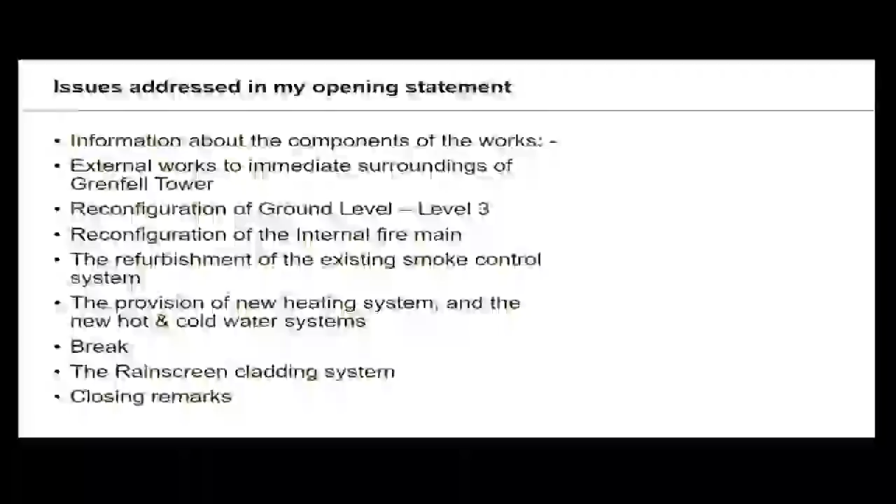This includes a description of the work done to the interior of the building, as well as the works done to the exterior of the building. I will provide an overview and then explain in the following order the external works to the immediate surroundings of Grenfell Tower, the reconfiguration of ground level to level 3, the reconfiguration of the internal fire main, the refurbishment of the existing smoke control system, the provision of a new heating system and the new hot and cold water systems, before ending with a detailed explanation of the materials forming the rain screen cladding works as I have found them in my work for the inquiry.

My colleagues working with me on my factual investigations are Susan Deeney, Peter Woodburn, Tom Parker, Alfie Chapman, Danielle Antonellis and Graham Flint. Dr. Flint is in attendance to operate the series of photos, illustrations and animations throughout the presentation, which we have provided in order to help understand the technical issues I'm focusing on today.

The original building construction and layout. As I've explained in section 3 of my preliminary phase 1 report, Grenfell Tower is a 24-storey building with a basement level and a ground to level 23 inclusive, plus a plant room located above level 23 at roof level. It is a residential block built in the early 1970s and is located in the Lancaster West Estate in the North Kensington area of London. The Lancaster West Estate is located in the Royal Borough of Kensington and Chelsea.

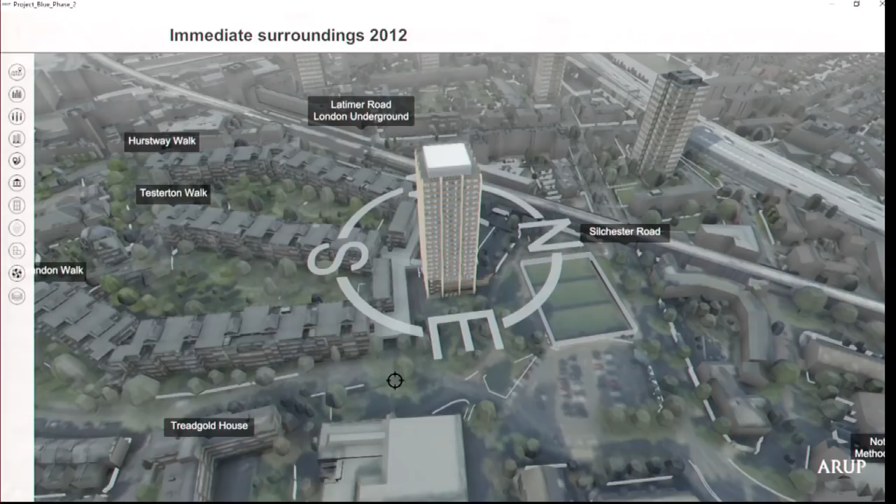To help explain the external spaces around the outside of Grenfell Tower, I have drawn on some additional information not currently in my report, using online mapping services and commercially available context models of the surrounding area. There was a walkway at level 2 of Grenfell Tower that allowed access from each of the finger blocks over to the tower. The finger blocks extend to the south side of Grenfell Tower and enclose 2 large green spaces. The area to the immediate east of Grenfell Tower is Lancaster Green, and there were children's play areas to the immediate west. To the north side lies Silchester Road.

Grenfell Tower is owned by the local authority, Kensington and Chelsea London Borough Council. Grenfell Tower was part of their provision of social housing in the borough. The management of social housing in the borough was devolved in 1996 to the Kensington and Chelsea Tenant Management Organisation.

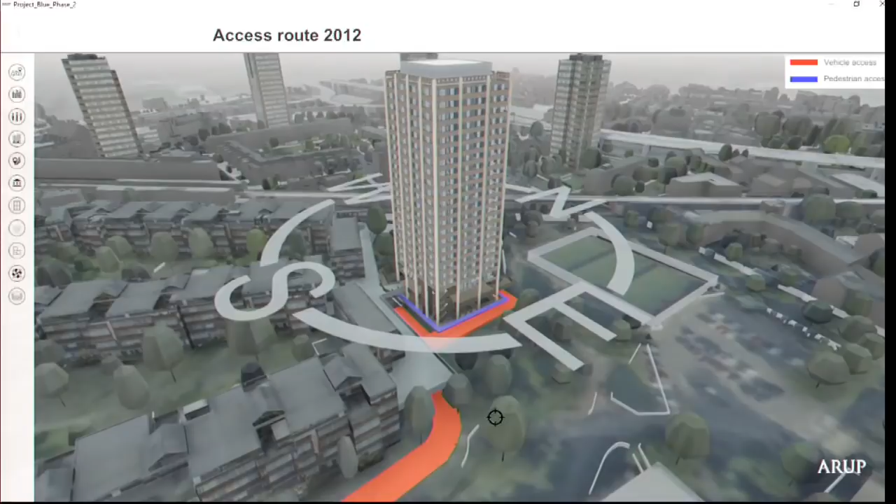The presence of the walkway is important in retrospect because it means that whilst it was tall enough to allow fire vehicles to access underneath the walkway for the purposes of internal firefighting, such a walkway provides an obstacle for unplanned external firefighting, as became required during the fire. High-reach appliances would need to move out from underneath the walkway to deploy their ladder or platform and to deploy their stabilisation systems.

The area around the east, north and west side of the building was quite open, with a mixture of grassy areas and hard landscaping. It is useful to orientate from the south side, where the 3 finger blocks are located. Originally, outside and around the tower at ground level were positioned a ball game pitch, nursery play areas and other amenity landscaping. From online mapping services, it is apparent that the amenity landscaping around the base of the tower was largely retained until around 2012.

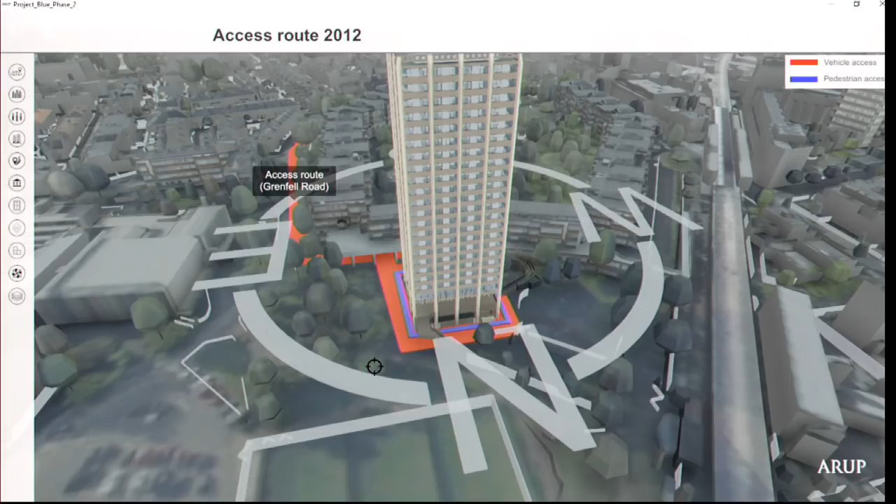In this image, all the areas around the building that could support vehicle access are highlighted in red. In its original form, therefore, fire vehicles could have moved around the base of the tower as follows: 3/4 of the south side, full access to the east and north side, half of the west side. Pedestrians, and therefore firefighters, could additionally reach all parts of the outside of the building originally at ground level, as I have marked here.

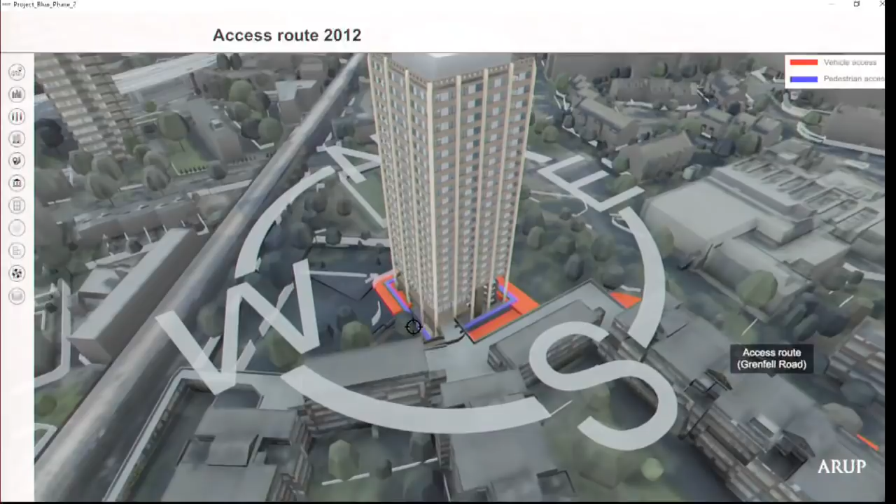Originally, there were 3 main pedestrian entry routes into Grenfell Tower. At ground level, firefighters could access the lifts within the central core there. Alternatively, they could climb one of the 3 open stairs external to the tower, up to the walkway at level 2. At this level 2, access was also possible into the central core, to the protected internal stair and the original lifts. Therefore, firefighters would have been able to access the inside of the tower by the walkway. However, fire vehicle access was only provided at ground level.

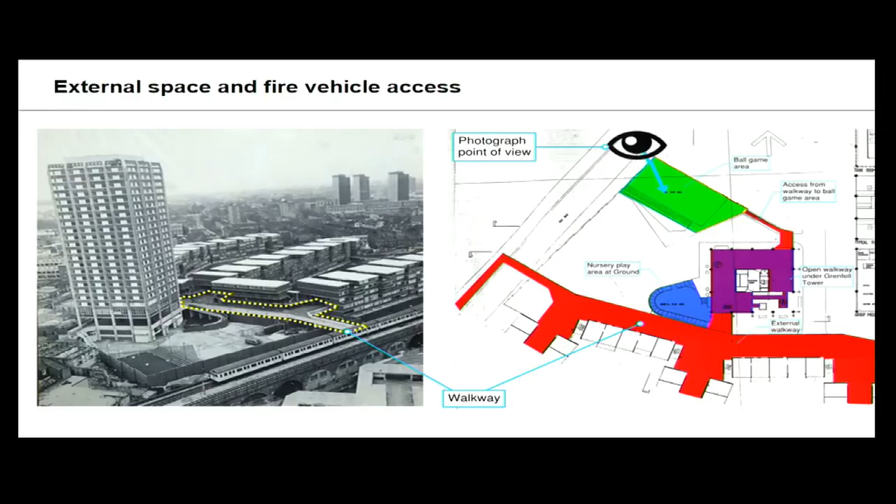Grenfell Tower is 67.3 metres tall. Originally, it contained 120 1- and 2-bedroom flats. There were 6 dwellings per floor on 20 of the 24 stories, with the other 4 stories being used for non-residential purposes. It was originally intended to house up to 600 people. Levels ground, 1 and 3 were more flexible open spaces, which were created for uses such as nursery, offices and a community health centre. Level 2 was left entirely open as a continuation of the walkway connecting to the adjacent blocks of the Lancaster West estate.

Each storey in Grenfell Tower is 2.6 metres high, except for level 2, which is 4.3 metres high, and level 3, which is a height of 3.9 metres. Grenfell Tower has a plan floor area of approximately 22 by 22 metres. It has a single, central, reinforced concrete core, reinforced concrete floors, and perimeter reinforced concrete columns. Reinforced concrete cross walls were provided to separate each flat at level 4 to level 23 inclusive. These walls did not extend to the basement level, nor did these walls exist at ground to level 3.

The structural stability mechanism for Grenfell Tower is that of a conventional concrete building with a lateral stability core in the middle of the building and concrete columns around the perimeter supporting gravity loads. The floor is a flat, reinforced concrete slab, transferring load directly to the core. At the perimeter of the building, loads are transferred into the columns directly by the floor and via the precast perimeter beams. Additional support to the floor is provided by the concrete cross walls between the flats.

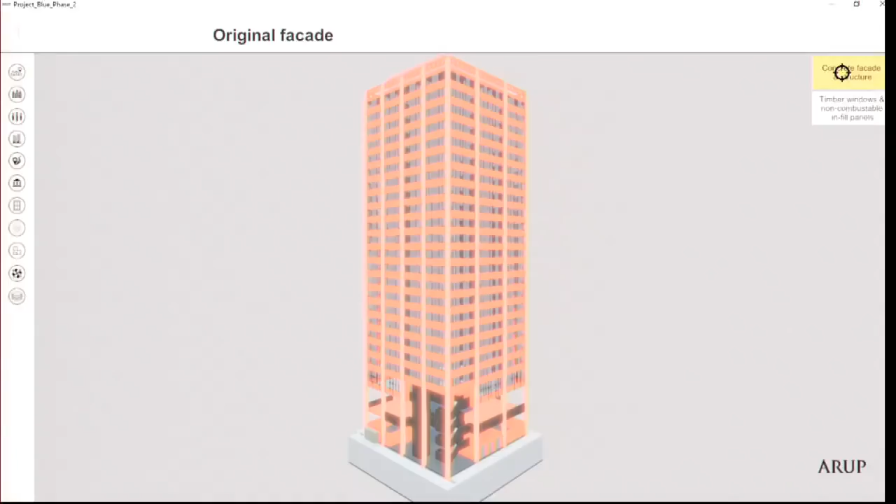The original external wall of Grenfell Tower consisted of exposed concrete surfaces and glazing. The perimeter beams were solid concrete. The opening between each perimeter beam was filled with a combination of sliding windows held in timber frames and non-structural, non-combustible infill panels. The specific material of the infill panels is currently unknown, but I understand it to consist of asbestos-bearing cementitious material.

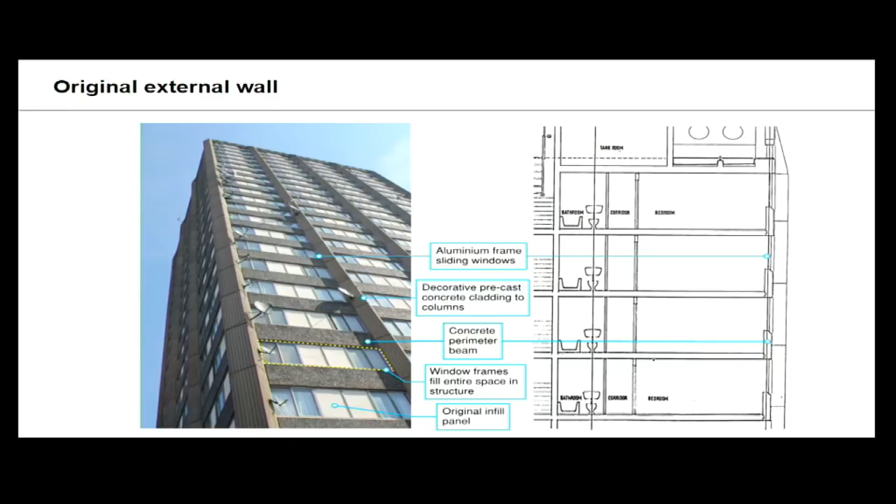The external wall was a single system. This meant there was no void or space concealed within that external wall. From here, I will refer to such spaces, concealed spaces, as cavities. Cavities are spaces enclosed by elements of a building or contained within an element of the building. I will be presenting more information on the issue of cavities in building construction later in my presentation. I now move inside the building to describe the original construction of the window and the external wall internally.

Here is a photograph from the inside of a 2-bedroom flat before the refurbishment works were undertaken. This is taken from section 8.4 of my report. The photograph shows the original form of the interior window finishes and the windows themselves. The windows were originally side-sliding, metal-framed windows in a wooden frame fixing system.

As I have already noted, these windows and the adjacent infill panels fully filled the space between each perimeter beam from floor to floor. The window sills, the window jambs on both sides, and the head of the window appear to be lined in timber. The original infill panel also appears to have been faced with timber on the room side.

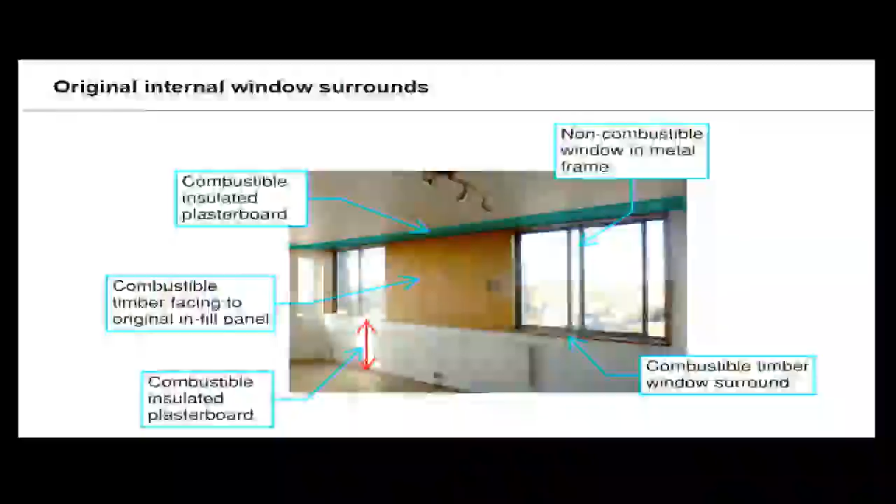Below the windows, a plasterboard covered with a polymeric insulation, a product called pearl board, was applied directly to the concrete perimeter beams. This layer of pearl board was also applied to the concrete ceiling in a small area close to the external wall, but ran along the full perimeter of every room in every flat at ceiling level.

Therefore, in terms of combustible material, the original design contained the internal timber surrounds and timber lining of the infill panel, as well as the pearl board above and below the window on the room side. This combustible material did not extend to the outside of the building.

Levels ground, 1 and 3 contained a nursery at ground floor, community use rooms at level 1, and a health centre at level 3. The layout of levels 4 to 23 was the same on every storey. There were 6 flats on each of these storeys. The flats in each corner were 2-bedroom flats, and the remaining 2, one on each side of the core, were 1-bedroom flats. Reinforced concrete cross walls and floors separated each flat on level 4 to level 23.

Therefore, each flat was enclosed in fire-resistant construction. This is known as compartmentation, and I will further describe this concept later on. Within the central core was a common lobby that provided access to each of the flats. This lobby also provided access to the residential lifts and the only means of escape, the single escape stairs. This lobby was a separate compartment to the flats and enclosed within its own fire-resisting concrete walls.

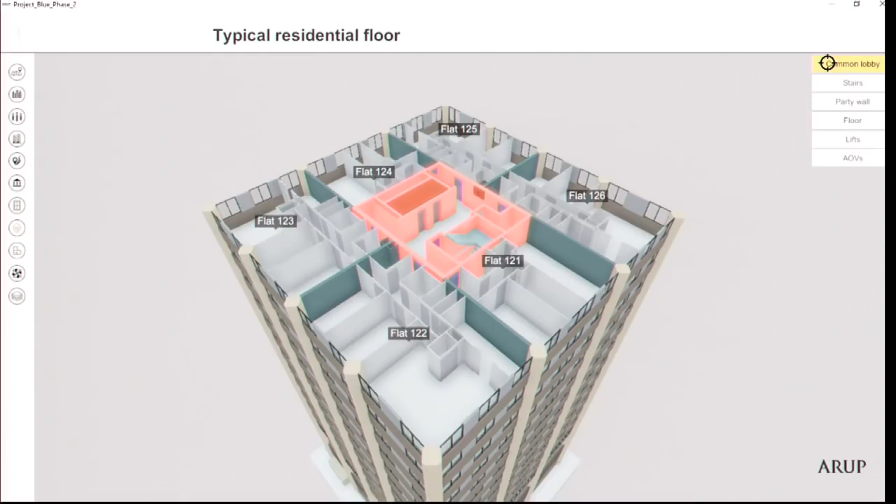The original smoke control system used automatic vents on the north wall of the lobby to exhaust smoke into smoke exhaust shafts on the north side, with fresh air being supplied from fresh air shafts through automatic vents on the south wall of the lobby. These smoke and fresh air fans were provided for firefighters to operate if required.

The basement has been used since 1974 as a plant space for the various electrical, gas, water and heating systems in the building, with multiple services shafts rising up from the basement through every storey in the tower. Level 24 is roof level. This level had a fully enclosed plant space in the central portion of the storey, with an open walkway around the perimeter of the roof. A ladder was also provided to the roof of this main plant enclosure.

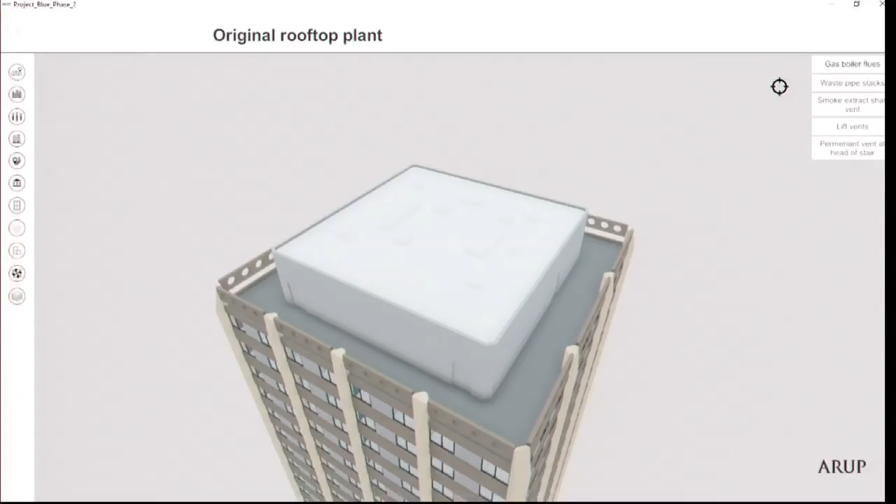There, at the roof of the plant enclosure, were located the outlets from the flues from the basement gas boilers, the outlets from the smoke control system, the outlets from the lift motor room and lift shaft ventilation systems, the permanently open vent provided at the top of the stairs, and the outlet vents to the waste pipe stacks serving each of the flats on each of the floors. This ends my explanation of Grenfell Tower and its surrounding area as it was designed and constructed between 1967 and 1974.

I will now set out the fire safety requirements for high-rise residential buildings in England, and in doing so address specifically the design requirement to provide a stay-put strategy. I will explain how it is designed and how it is intended to operate. After a short break, in the second part of this presentation, I will then explain each of the active and passive fire protection measures required to create the safety condition, the stay-put strategy.

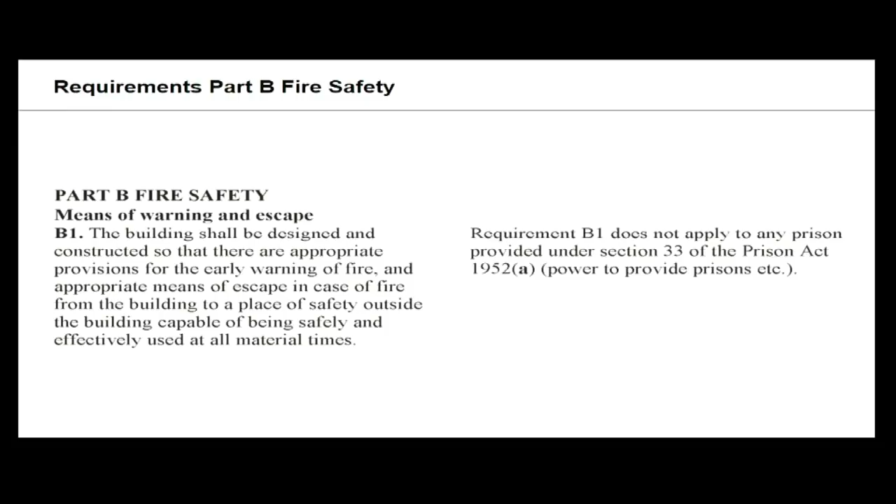Fire safety requirements are considered by means of 5 specific requirements. I have reproduced each one on each of the next 5 slides. B1 deals with means of warning and escape. The building shall be designed and constructed so that there are appropriate provisions for the early warning of fire and appropriate means of escape in case of fire from the building to a place of safety outside the building, capable of being safely and effectively used at all material times.

Requirement B2 deals with the requirements to inhibit internal fire spread as it relates to the internal linings of a building. Requirement B3 deals with further requirements for internal fire spread as relates to the structural stability of the building, subdividing a building with fire-resisting construction, and preventing the unseen spread of fire and smoke within concealed spaces.

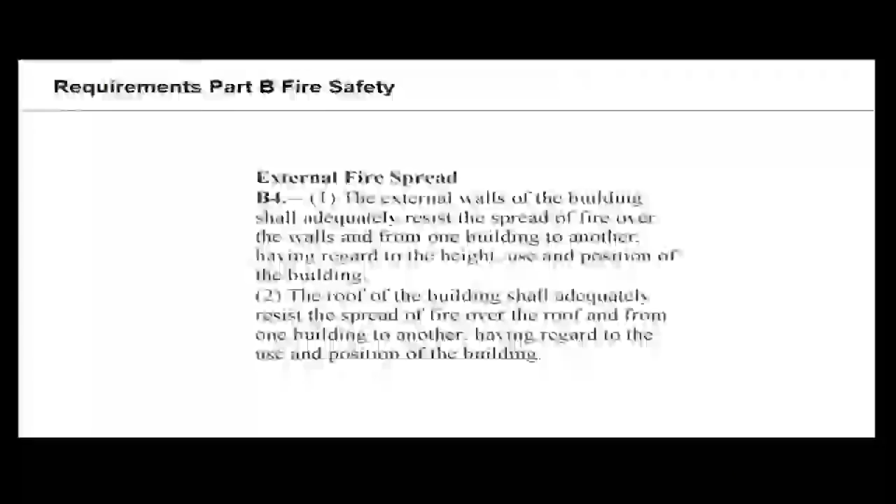The requirement B4 makes requirements regarding external fire spread, and specifically that the external walls of the building shall adequately resist the spread of fire over the wall and from one building to another, having regard to the height, use and position of the building. It makes requirements for the fire performance of the roof of the building.

Requirement B5, the fifth and last of these building requirements, deals with the requirements for access and facilities for the fire services. Specifically, it requires that the building shall be designed and constructed so as to provide reasonable facilities to assist firefighters in the protection of life. Further, it requires that reasonable provision shall be made within the site of the building to enable fire appliances to gain access to the building.

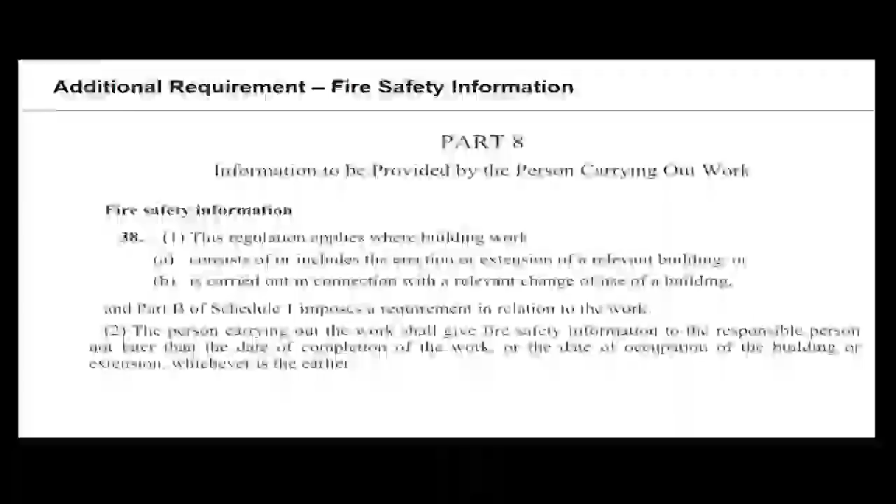There are three other general requirements, but specifically relating to fire safety. First of these three is the requirement to provide fire safety information, Regulation 38. This requires the person carrying out the building work to give fire safety information to the responsible person for that building no later than the date of completion of the work and as reproduced on this slide. The responsible person is the person who owns or controls the building.

The required fire safety information to be provided is defined in the building regulations as information relating to the design and construction of the building, which will assist the responsible person to operate and maintain the building with reasonable safety. This is for any building where the Regulatory Reform Fire Safety Order applies. This is the legislation that provides for fire safety duties when buildings are completed and occupied. The building regulations relate to design and construction stages only.

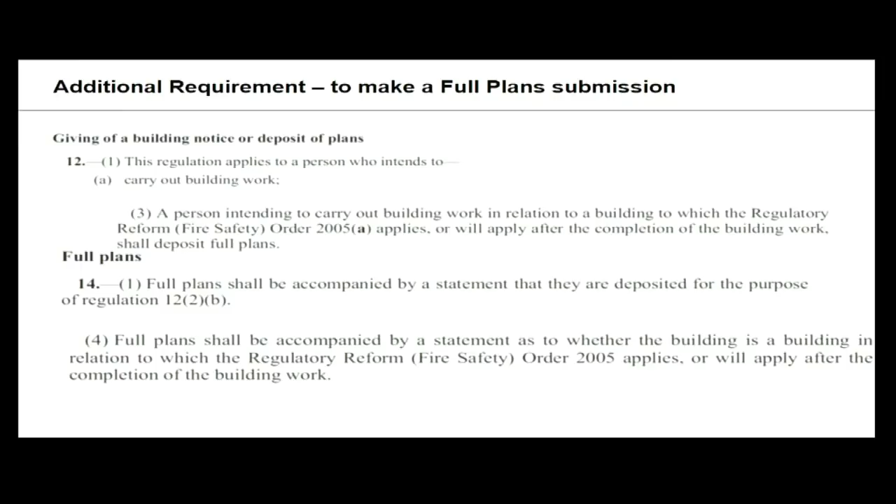There is a further requirement for any building to which the Regulatory Reform Fire Safety Order will apply once that building is occupied. That is a requirement to make a full plan submission. This means providing a description of the proposed building work and any other plans necessary to show that the work would comply with regulations. And the final requirement is the requirement of the local authority to provide a completion certificate for buildings to which the Regulatory Reform Fire Safety Order will apply.

I note the requirement for a local authority to ascertain, after taking all reasonable steps, that the relevant requirements specified in the certificate have been satisfied. The relevant requirements mean the requirements of Regulation 38 regarding the required fire safety information being provided to the responsible person and the 5 requirements of Part B. I note also that the building regulations currently state that such a certificate is not conclusive evidence that the requirements specified have been complied with. These are the requirements under the building regulations.

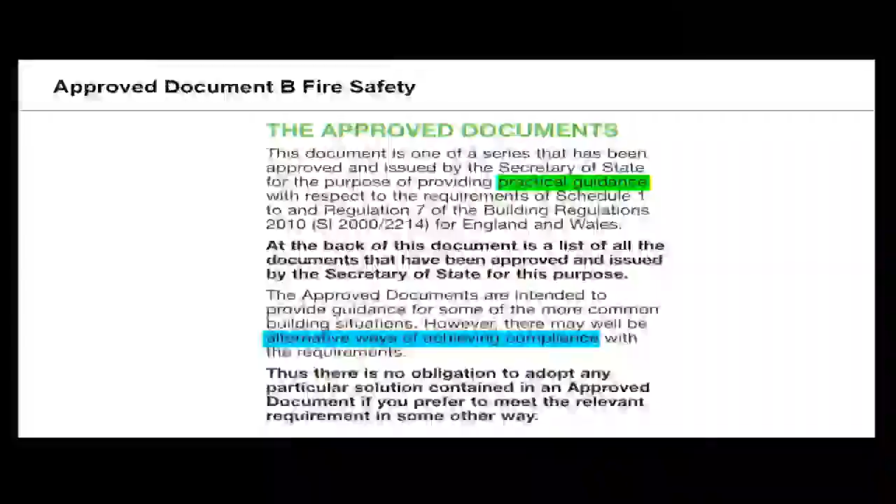I would like now to draw your attention to approved document B for fire safety, which is approved, as I said, by the Secretary of State for the purposes of what's called practical guidance with respect to the requirements contained in the building regulations. Therefore, approved document B communicates practical guidance for the 5 fire safety requirements B1 to B5 inclusive. I note it acknowledges that there may well be alternative ways of achieving compliance with the requirements.

I have no evidence that such an alternative approach was considered in matters relating to Grenfell Tower and will therefore not mention the concept of an alternative approach again. I will refer to this statutory guidance document, approved document B. Just as the building regulations directly connect design and construction related duties to the Regulatory Reform Fire Safety Order, so too does the approved document make that clear.

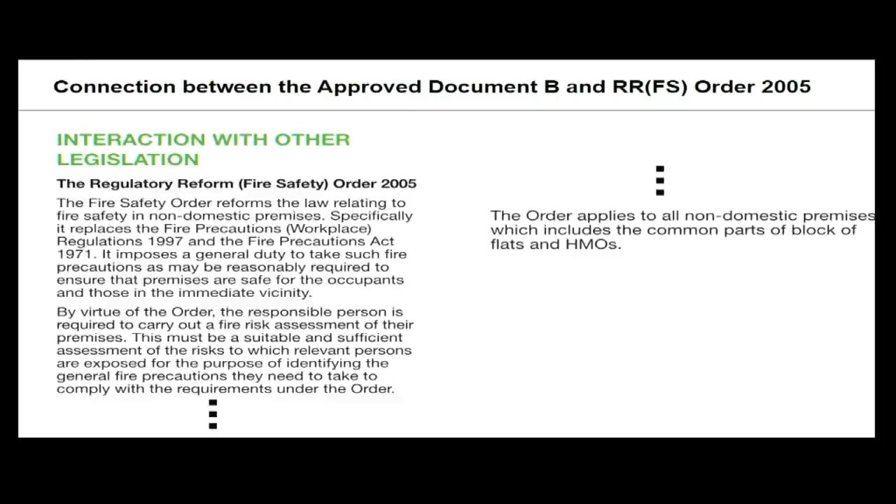The Approved Document B states, for blocks of flats, the Regulatory Reform Fire Safety Order applies to the common parts of blocks of flats only. It advises it would be useful for designers to carry out a preliminary fire risk assessment of the building as part of the design process, and how this fire risk assessment can then be used in the building regulation submission and can be used to assist the Fire Safety Enforcing Authority in providing advice on any additional provisions that may be necessary in the occupied building.

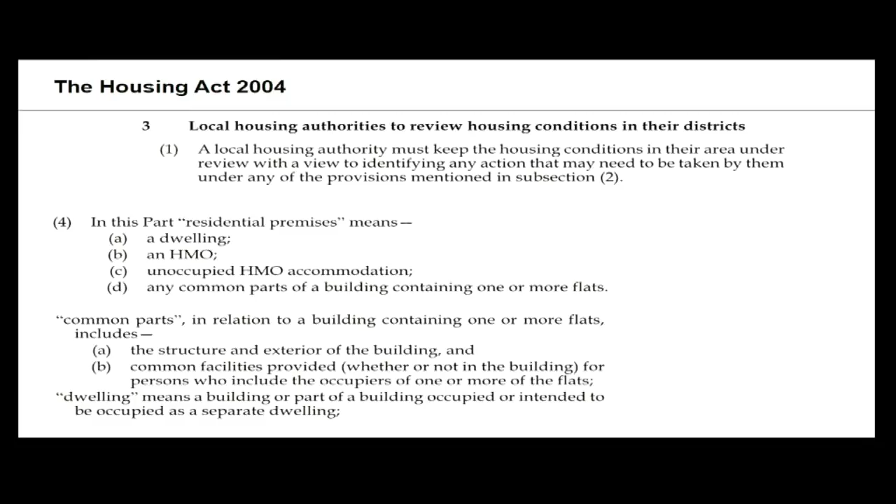However, for high-rise residential buildings, the Housing Act 2004 also applies and exists in parallel with the Regulatory Reform Fire Safety Order. Section 3 of the Housing Act requires local housing authorities to keep housing conditions in their area under review and to investigate and take action against hazards that may be present. Fire is explicitly referenced as a relevant hazard in Section 10 of the Act.

Where fire hazards are identified in the common parts of flats, the Act requires the local housing authority to consult the local fire authority where possible before taking action. It is important to note that the Housing Act 2004 states the common parts of a building include the structure and the exterior of the building.

Before I explain the Stay Put strategy, it's important to note that the term Stay Put is not used anywhere in Approved Document B. It states, the fire is generally in a flat. There is no reliance on external rescue. Measures in Section 8 provide a high degree of compartmentation and therefore a low probability of fire spread beyond the flat of origin, so that simultaneous evacuation of the building is unlikely to be necessary. And although fires may occur in the common parts of the building, the materials and construction used there should prevent the fabric from being involved beyond the immediate vicinity.

It further states these provisions assume that in the design of the building, reliance should not be placed on external rescue by the Fire and Rescue Service, nor should it be based on an assumption that the Fire and Rescue Service will attend an incident within a given time. This approved document has been prepared on the basis that in an emergency, the occupants of any part of a building should be able to escape safely without any external assistance.

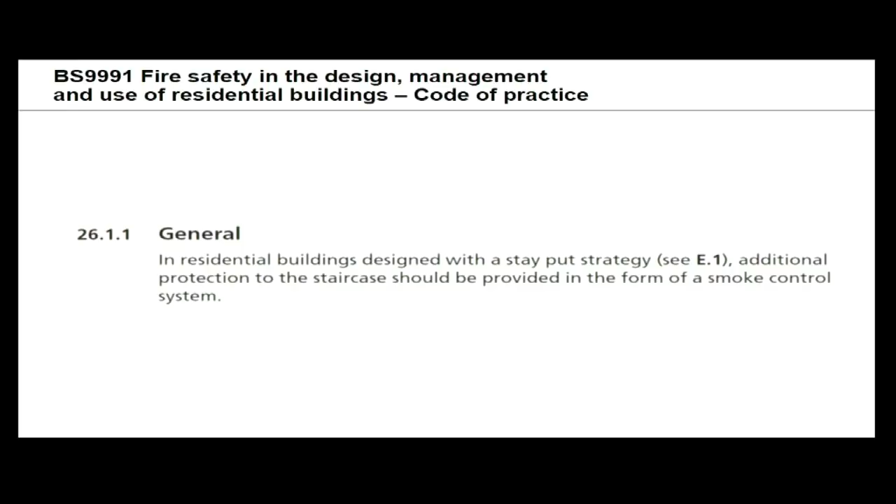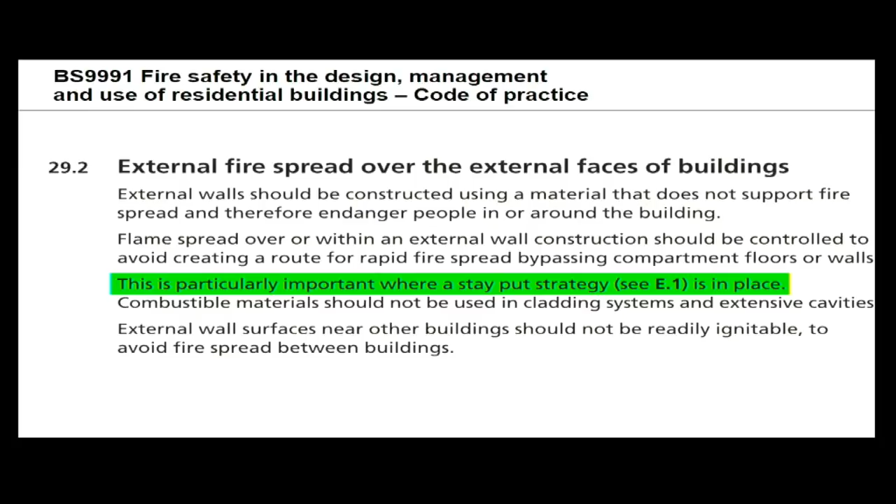Secondly, BS 9991 refers to the need for additional protection to the staircase by the provision of smoke control because of the Stay Put strategy. Thirdly, regarding an increase in fire resistance periods for structure for the occupants of other dwellings remaining in place. And finally, it specifically references the Stay Put strategy regarding the fire performance of the external face of the building. It says, flame spread over or within an external wall construction should be controlled to avoid creating a route for rapid fire spread by bypassing compartment floors or walls. This is particularly important, it says, where a Stay Put strategy is in place.

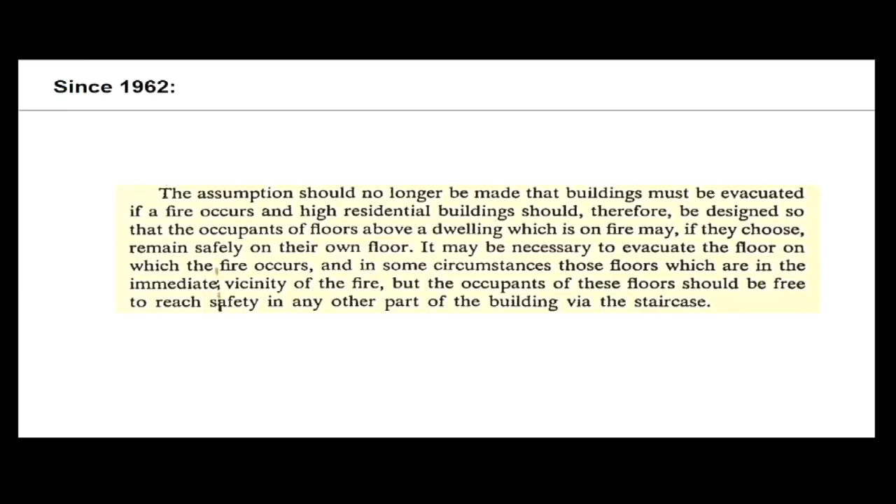And I would like to conclude with a reminder from the very first British Standard Code of Practice for Flats, referred to as CP3, where in 1962 it provided the first explanation of the Stay Put strategy, where occupants, if they choose, remain safely on their own floor, and occupants on the floor on which the fire occurs, and in some circumstances those floors in the immediate vicinity of the fire, should be free to reach safety in another part of the building via the staircase. Since that time, a total building evacuation has not been provided for when designing the active and passive fire protection measures.

I have set out each of the statutory guidance document, Approved Document B, and the British standards since 1962, because they all provide the same requirement for active and passive fire protection measures in high-rise residential buildings. I note that while stay put is directly referenced in the British standards, no such mention of it, nor what it relies upon, is provided in the Approved Document B. I will refer to those published guidance documents at times throughout my presentations today. These published guidance documents are all matters of building regulations. They are not matters of fire brigade policy.

The stay put strategy. During a single flat fire, the occupants of that flat evacuate, and all other occupants are safe if they remain where they are. The concept of being safe to remain where they are during a fire is the stay put strategy. It is the single safety condition provided for through the statutory guidance document, Approved Document B, and all versions of the British Standards for flats to date.

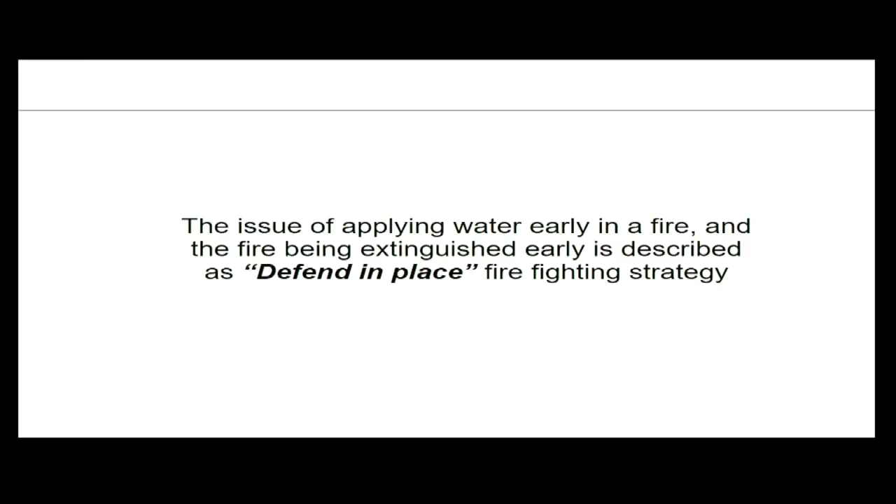Since 1962, CP3 states, the guiding principle in the recommendations which follow is safety of life. In securing this, means of escape, construction and firefighting all play a part. Section 701 goes on to state, in high blocks of flats it is essential that provision should be made to assist the fire service in applying water to a fire as early as possible. The need to apply water early in a fire and the need for the fire being extinguished early are required of the fire brigade. This form of firefighting is provided for by means of the active and passive fire protection measures in the building too.

So the building construction, its active fire safety systems and the firefighting in combination provide the safety of life and are the foundation of the stay put strategy. Defend in place firefighting also relies on the high degree of compartmentation in a high-rise residential building because it is this compartmentation that enables the single flat fire event upon which the stay put strategy relies. This compartmentation is the very basis of design.

I will now narrate an explanation of how the stay put strategy is designed to function in a fire. This is in order to explain how the design of the active and passive fire protection measures, which includes the external wall fire response, provides the safety condition required, which is for the building residents and for the firefighters. The content of this section of my presentation is drawn from sections 3.2, 3.3, 3.4 and section 18 of my report.

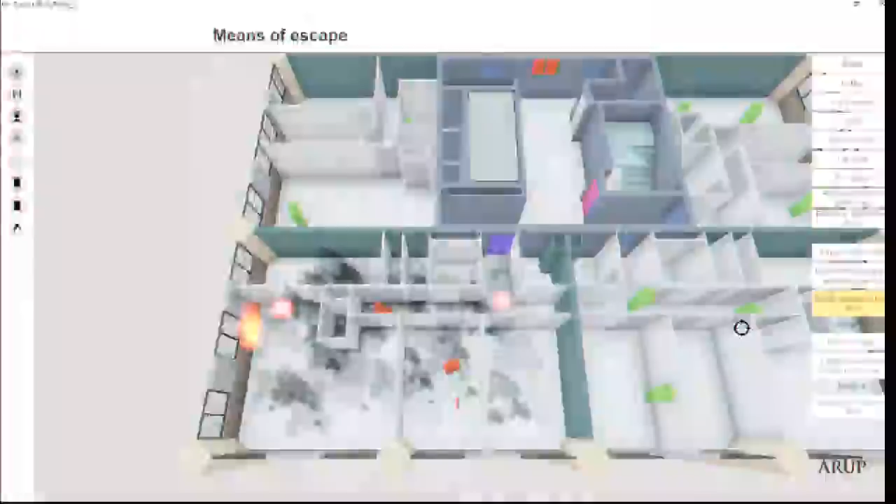In the event of a fire in a flat, a fire detection and alarm system should be present in the flat and raise the alarm for occupants in that flat only. No alarm will sound anywhere else in the building. The fire brigade will not be alerted automatically. Once alerted to the fire, the occupants should leave the flat with the door shut behind them. To support this first stage of evacuation from the flat itself, a protected entrance hall is required within the flat. In a single stair building, the person from within the flat on fire must first escape through the common lobby over to the stair entrance.

A range of fire protection measures are provided to protect the occupants when travelling through the lobby. Fire-resisting walls around the flat of fire origin, fire-resisting walls around the protected lobby and around the protected stairs, fire doors in the relevant fire-resisting walls, a smoke control system extracting heat and smoke from the protected lobby, designed to prevent smoke from being able to penetrate into the stairs, but providing some local protection in the lobby too. Controls on materials in the common lobby to prevent rapid fire spread through this part of the escape route in the event fire breaks out of the flat compartment.

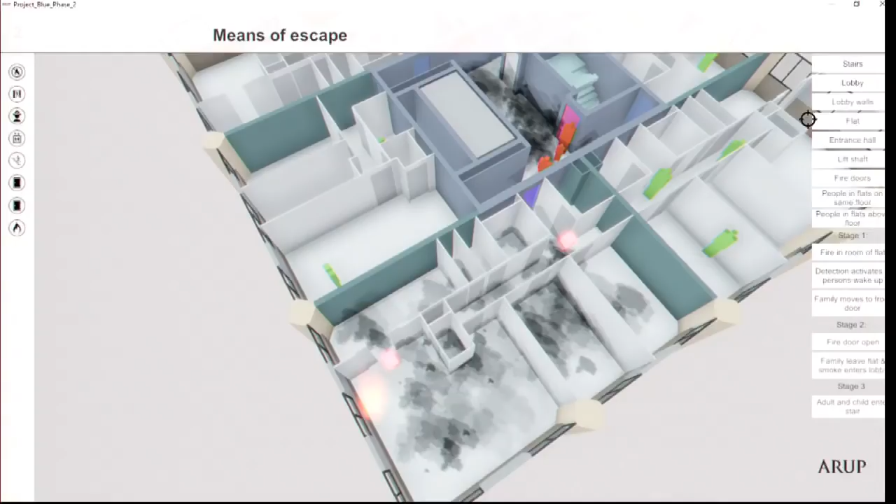People in adjoining dwellings on the same floor do not automatically evacuate. They have received no alarm or signal to evacuate. The design is focused, therefore, on containing a fire within the flat of fire origin, creating a single flat fire event. This is provided through the fire-resisting walls and floors in that flat. The final side of the fire-resisting box is the external wall. In accordance with the building regulations, the construction of the external walls are required to adequately resist the spread of fire.

Therefore, the people in adjoining flats on the same floor who rely on the same horizontal escape route through the lobby are protected, because the design intent is that the fire stays within this one compartment or box around the flat. Everything is invested in preventing the internal spread of fire. The required external wall fire performance, based on adequately resisting the spread of fire, is intended to prevent an external fire scenario beyond the single flat on fire.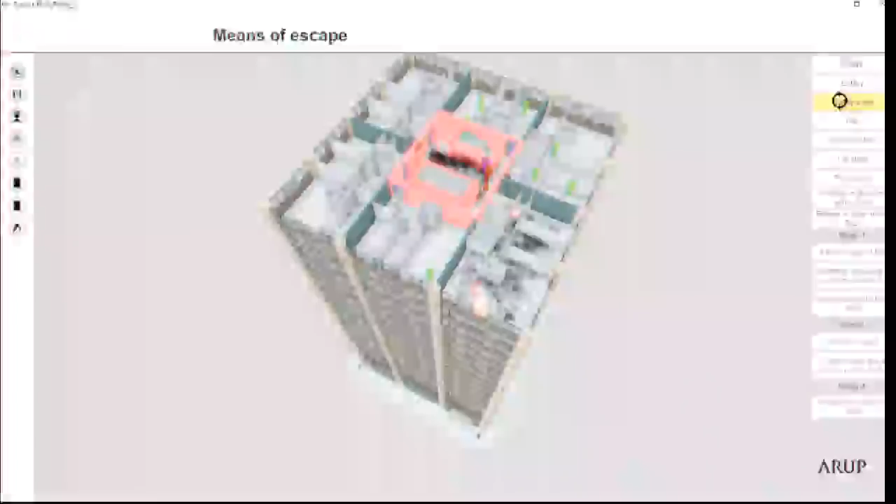Equally, people on the floors above the floor where the flat fire has started are also to be protected from the single flat fire below them, again by the measures provided to contain the fire in one flat, again through the compartmentation to the flats, lobby and stairs, along with the lobby smoke control, and again the external wall, and the requirements for the construction of that external wall should also provide protection to the people in the flats above the flat on fire.

A person requiring assistance will also need to escape from their flat to the lobby. Once they are out in the lobby, they are now separated from the immediate effects of the fire in the flats. However, protection measures for the lobby are not intended to provide indefinite protection, and it may not be safe for a person to remain within the lobby.

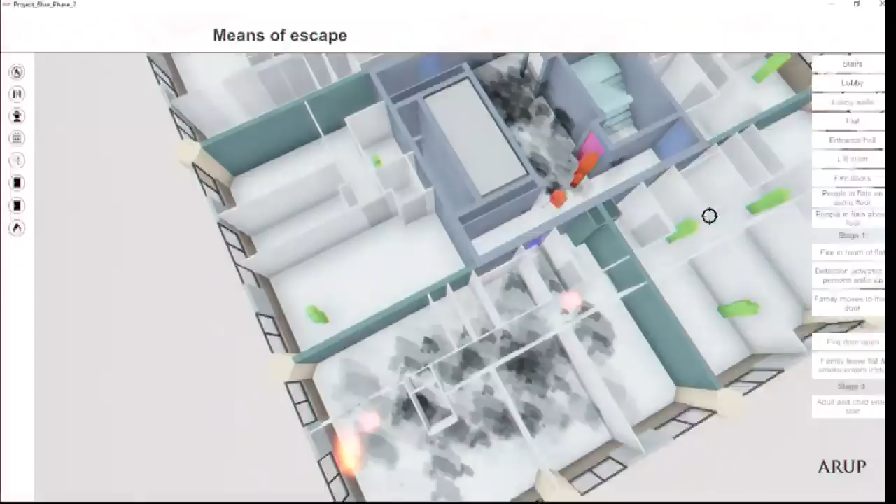At this stage, the choices available to a person requiring assistance to escape are: to escape using the stairs if they are able, to use an evacuation lift with assistance from building management if such assistance is available, to use the firefighting lift with assistance from the fire brigade, to be carried down the stairs by firefighters, building management staff, or potentially their neighbours. There is no provision required in the statutory guidance for residential buildings, unlike other building types, to provide equipment for those persons.

So there is no provision made for them to either contact building management, should they even be present in a building, nor to communicate directly with the fire service present in the building. The person can only make a personal 999 call. In other building types, refuges with communication devices are required.

Once occupants of the flat on fire have made their way through the lobby, the final part of their evacuation is down the stairs. And once down the stairs, they should now phone 999 and alert the fire brigade to the fire. The protection provided to stairs is intended to physically prevent the penetration of smoke and fire into the stair enclosure by provision of fire-resisting construction, including the stair door.

Prevent smoke from entering the stair by provision of fire-resisting lobbies, including the flat entrance fire door and smoke ventilation systems. And so also prevent the spread of fire and smoke, blocking use of the protected stair for any residents above the fire floor. The protection measures in the lobby and the stair, however, are also provided to create a safe working environment for the fire brigade.

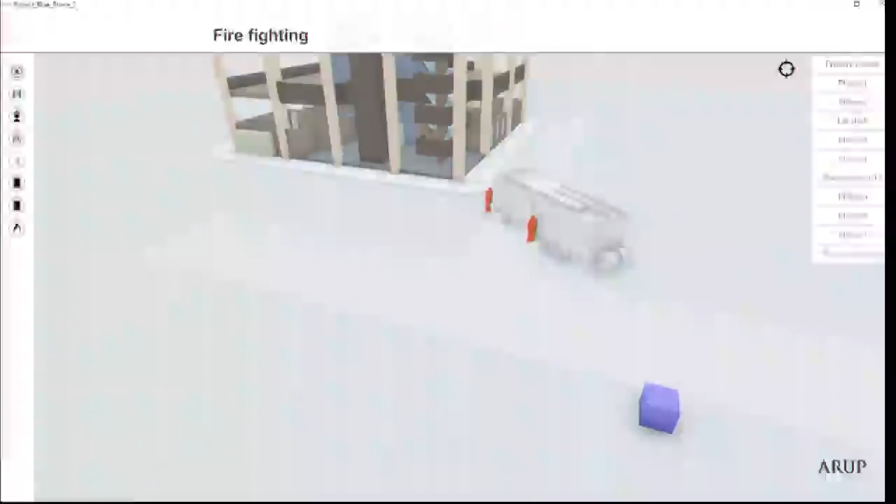The requirements of the building regulations to provide active and passive fire protection measures are relied on by all building occupants during a fire, all residents and all firefighters. Since the first Code of Practice for Fire Safety in Flats was published, it states, reliance on such appliances as manipulative types of escape or mobile ladders is considered unsatisfactory. High-rise residential buildings must therefore be designed on the basis that firefighting does not occur from outside.

This concept has been carried over into all modern design codes, where the regulations require provisions only for internal firefighting in high-rise residential buildings. Therefore, the building regulations require adequate access to buildings for firefighters and their vehicles only at the entry point to the building and nowhere else around the building. The provisions made for firefighting are also based entirely on an internal fire occurring.

By design, these provisions are made on the assumption that a single internal flat fire, contained within the compartment, will occur. The construction of the external wall to this compartment is to adequately resist the spread of fire, such that mitigating a spreading external fire is not incorporated into any of the other protection measures in the building as provided for the firefighters. The external fire scenario not happening is critical to maintaining this box around each flat. The high degree of compartmentation is also required for safe firefighting in high-rise residential buildings.

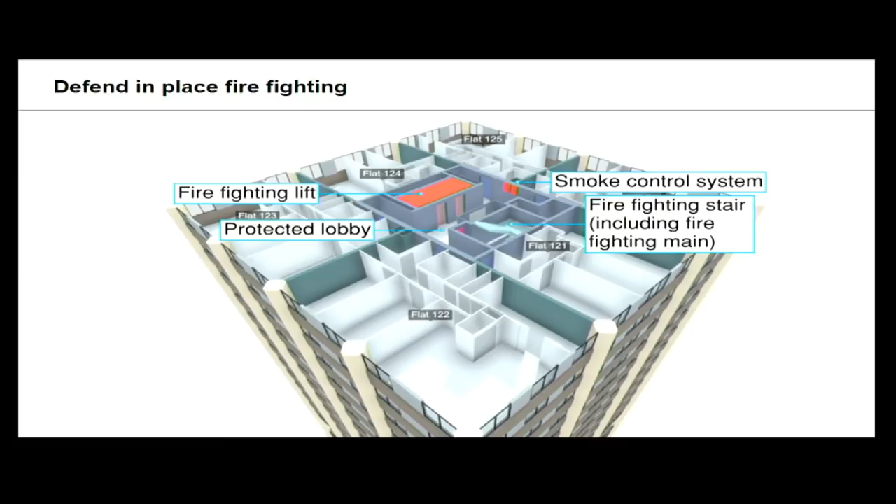Once inside the building, the following is provided for firefighters: a firefighting stair; a firefighting lift, which is a lift that can be operated under sole fire brigade control and has safety features to permit it to be used during a fire; a firefighting main, a dedicated system for conveying firefighting water to the upper floors of a building; a protected lobby on every floor, including a smoke control system, a protected space between the firefighting stairs and all flats.

The design requirements provide for the following firefighting process. On arrival, the fire brigade will secure a water supply for firefighting from outside the building by means of the required water hydrant in close proximity to the building. The firefighting teams move towards the building and enter. The statutory guidance provides them with a firefighting lift within a protected lobby. The firefighters can approach the firefighting lift and take it under their direct control.

The lift is then used by fire crews to carry their equipment, such as hoses, tools and breathing apparatus, and by design is assumed to go to the lobby 2 floors below the fire. This lobby becomes the bridgehead, which is an area used to muster firefighters and their equipment. This lobby is designed to protect the firefighters from fire and smoke on the fire floor above and maintain a safe air environment there. That is air safe to breathe without the protection of breathing apparatus.

Firefighters will be tasked with approaching the flat containing the fire and extinguishing it. From within the stair, they connect their fire hose and branch into the building fire main. Firefighters use the protected stair to walk up to the fire floor with a charged hose. They are provided with sufficient water by means of the building fire main provisions, and this includes the provision to charge a second hose, as may be required to protect those firefighters who are now in the flat on fire and suppressing that fire there.

The firefighters are now operating within what they term the fire sector. One example of this is a fire sector which includes the fire floor, the floor above and below. The active and passive fire protection measures are required to prevent a fire from significantly spreading beyond a single flat in the fire sector, and I have found it useful to understand how compartmentation is so important when firefighters split the building into sectors. So firefighters rely on the compartmentation and the smoke control to the lobby to also set up any search sectors needed above a fire sector. They rely on the protected stairs and lobby to move safely to any of these required search sectors.

They rely on the compartmentation and smoke control within the building to set up what they call the lobby sector, which is below the fire sector and used for coordination of all their required logistics. Again, they rely on the protected stairs and lobbies to move safely up and down to the lobby sector. Finally, the firefighting lifts are provided so they can be safely used during the fire to transport firefighters and their equipment to a floor of their choice.

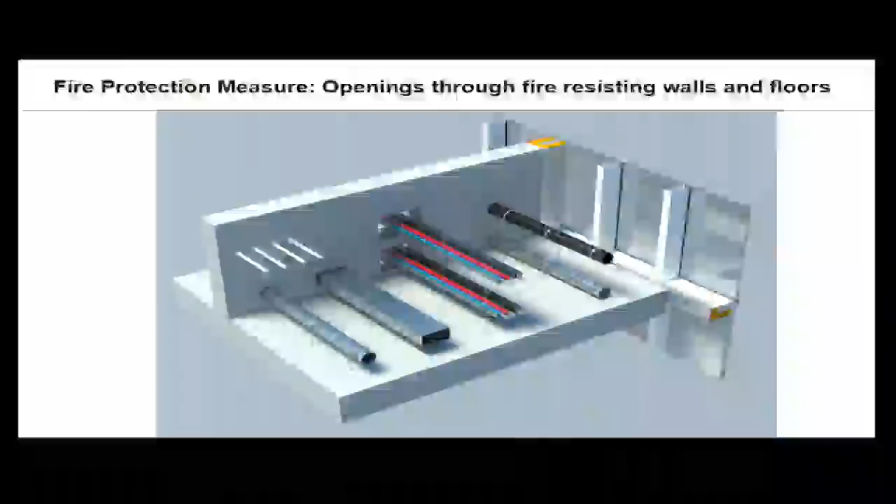These compartments or fire-resistant boxes are required in multiple locations: the box enclosing each flat, the box enclosing every lobby, the box enclosing any vertical or horizontal shafts, the box enclosing the escape stair. These internal compartment walls and floors protect the occupants of the building. This is achieved by preventing the fire from spreading to adjacent flats or to shared public spaces through the provision of fire-resisting walls and floors and protecting any openings in those walls and floors. Compartment walls and floors are fire tested to demonstrate their ability to prevent the passage of fire and heat.

As well as the structure of the walls and floors, buildings also need to contain a variety of different services, such as cables, ducts and pipes. These services need to be able to pass through the building in order for the mechanical services to operate as intended. Openings are therefore created to allow the services to pass through. These openings need to be sealed to prevent the spread of fire through any required fire-resisting compartment enclosure.

If a fire-separating element is to be effective, every joint or imperfection of fit or opening to allow services to pass through the element should be adequately protected by sealing or fire stopping, so that the fire resistance of the element is not impaired. Approved Document B defines a fire stop as a seal provided to close an imperfection of fit or design tolerance between elements or components to restrict the passage of fire and smoke.

Fire doors are also a form of protection to an opening in fire-resistant compartment enclosures. A fire door is defined in British Standard 8214 as a door which, together with its frame and hardware as installed in a building, is intended, when closed, to restrict the passage of fire or smoke and is capable of meeting specified performance criteria to those ends. As with the tested performance of compartment walls and floors and fire stopping, there are also required methods for demonstrating the specific performance criteria set for fire doors through fire testing.

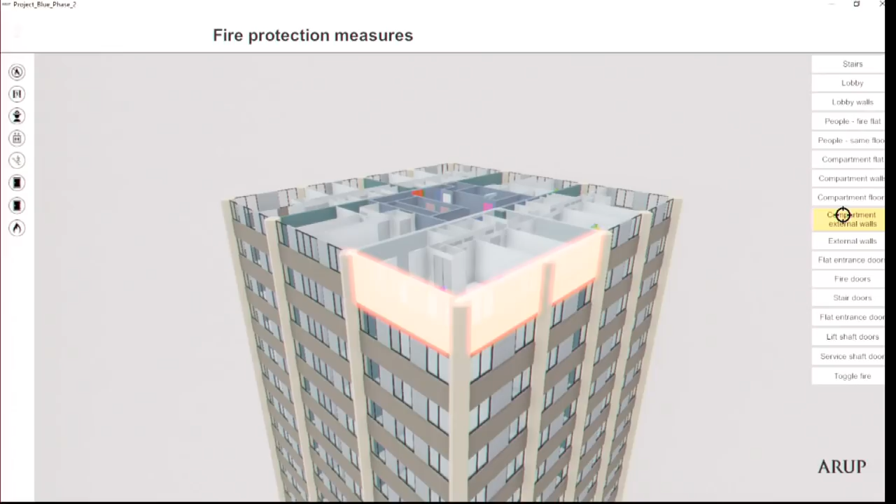Moving to the external wall component of the enclosure to a flat. This image shows the external wall forming one side of the fire-resistant box enclosing a flat. Regulation B4 requires the external walls are constructed so that the risk of ignition from an external source and the spread of fire over their surfaces is restricted by making provision for them to have low rates of heat release.

This is dealt with in section 12.5 of Approved Document B, which states, the external envelope of a building should not provide a medium for fire spread if it is likely to be a risk to health or safety. The use of combustible materials in the cladding system and extensive cavities may present such a risk in tall buildings.

External walls should either meet the guidance given in paragraphs 12.6 to 12.9 of Approved Document B, or meet the performance criteria given in the Building Research Establishment Report called Fire Performance of External Thermal Insulation for Walls of Multi-Storey Buildings for cladding systems using full-scale data from British Standard 8414. That report is referred to as BR 135. So taking each of paragraph 12.6 to 12.9 in turn first. Section 12.6 of Approved Document B states the external surfaces of walls should meet the provisions of diagram 40.

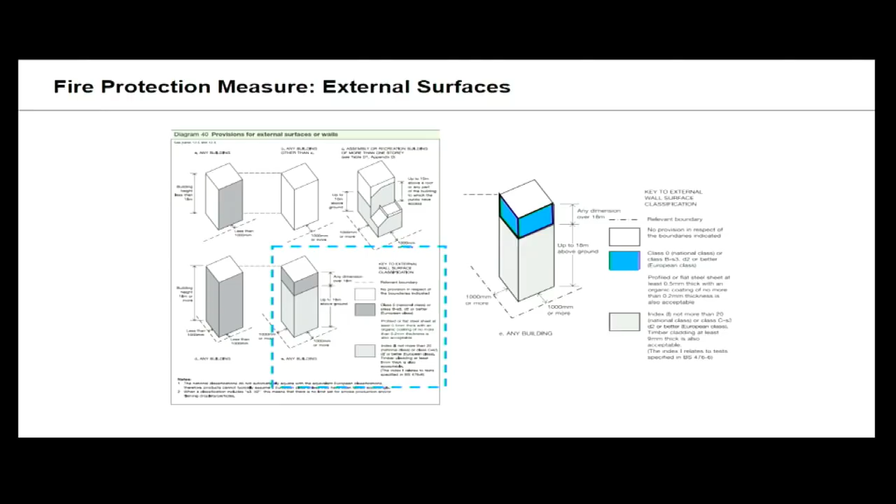Section 12.7 states in a building with a storey 18 metres or more above ground level, any insulation product, filler material not including gaskets, sealants and similar, etc., used in the external wall construction should be of limited combustibility.

And finally, section 12.8 and 12.9 relate to cavity barriers. The approved document B advises the provisions necessary to restrict the spread of smoke and flames through cavities are broadly for the purpose of subdividing: A. Cavities, which could otherwise form a pathway around a fire separating element, and closing the edges of cavities, therefore reducing the potential for unseen fire spread. B. Subdividing extensive cavities. In addition, consideration should also be given to the construction and fixing of cavity barriers provided for these purposes, and the extent to which openings in them should be protected.

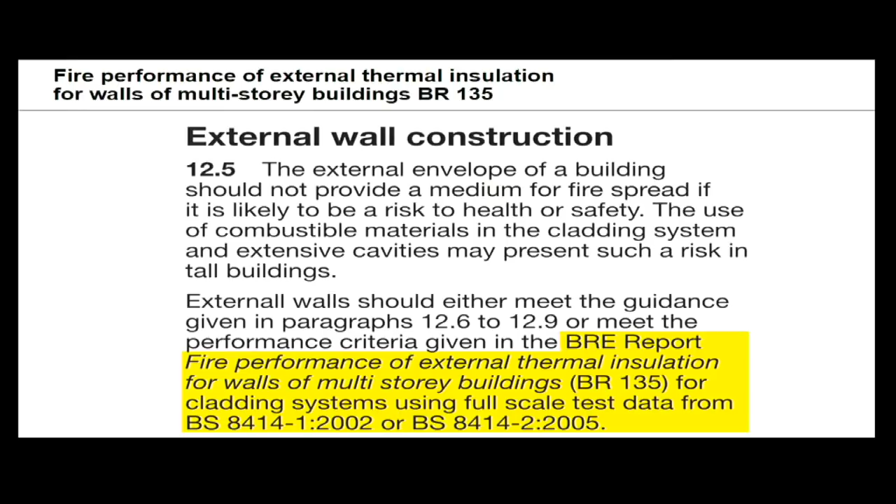Section 12.5 of approved document B states that as an alternative to following that guidance in 12.6 to 12.9, as I have just set out, the fire performance of the construction of external walls can be determined instead by reference to BR 135. This describes a fire test for external cladding systems so that they can be installed as close to typical end-use conditions as possible and subject to a specific localised fire. So either carrying out this test or complying with the guidance set out in the approved document B is intended to provide the required performance to the external wall of the flat.

That external wall should therefore be constructed so that the risk of ignition from an external source and the spread of fire over its surface is restricted by making provision for the external wall materials to have low rates of heat release. That is the provision made for the external portion of the box around each flat.

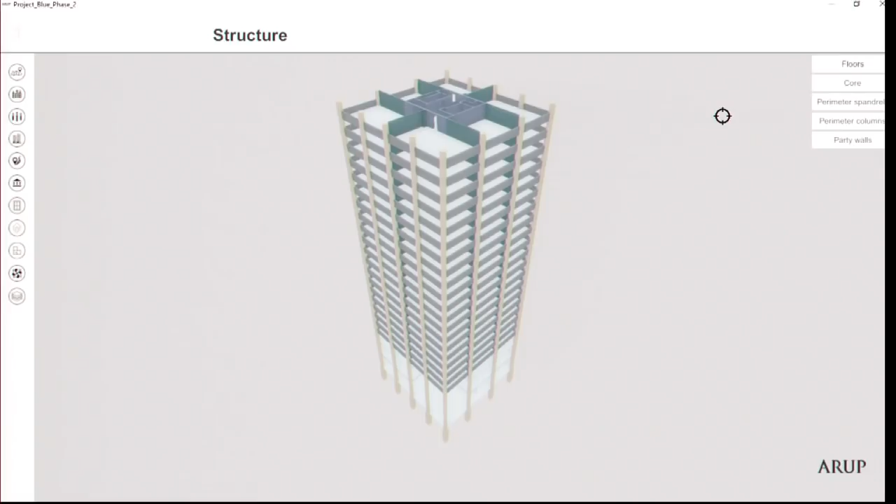Another passive fire protection measure is the provision of an overall stability system for the building during a fire. I present here the structural form of Grenfell Tower as an example. I described earlier this morning how the floors, walls, beams and columns all contributed to the designed fire stability system. Approved document B states that the load-bearing elements of the structure of the building must be capable of withstanding the effects of fire for an appropriate period without loss of stability. Approved Document B defines this as resistance to collapse, the ability to maintain load-bearing capacity during a fire.

For concrete buildings like Grenfell Tower, the structural fire resistance of the structure is achieved through the depth and thickness of the member and a specific depth of concrete insulating the embedded steel reinforcing bars. This combination of concrete and the reinforcing bars provide the stability system. Structural fire resistance is a passive fire protection measure because it requires no power to activate and once installed remains an intrinsic part of the building safety condition.

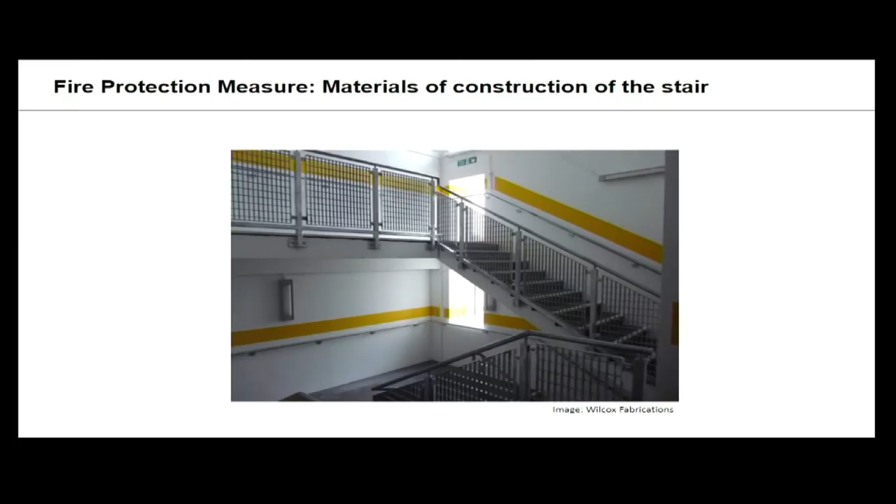Approved Document B states, the choice of materials for walls and ceilings can significantly affect the spread of a fire and its rate of growth, even though they are not likely to be the materials first ignited. It is particularly important in circulation spaces where linings may offer the main means by which fire spreads and where rapid spread is most likely to prevent occupants from escaping. Therefore, for a means of escape to comply with Regulation B1, capable of being safely and effectively used at all material times, it is required that the surfaces of walls and ceilings within protected lobbies and stairs are materials that restrict fire spread. Additionally, in accordance with Clause 5.19, firefighting stairs must be constructed of materials of limited combustibility.

I have described the passive fire protection measures. They are considered to be materials, products and structures. Their required fire performance and how to achieve that performance is then addressed in Appendix A of the Approved Document B. Appendix A describes each of the different classes of performance and each of the appropriate methods of test. Appendix A states, in such cases, the material, product or structure should: A. Be in accordance with the specification or design which has been shown by test to be capable of meeting that performance, or B. Have been assessed from test evidence against appropriate standards or by using relevant design guides as meeting that performance, or C. Where tables of notional performance are included in this document, conform with an appropriate specification given in these tables.

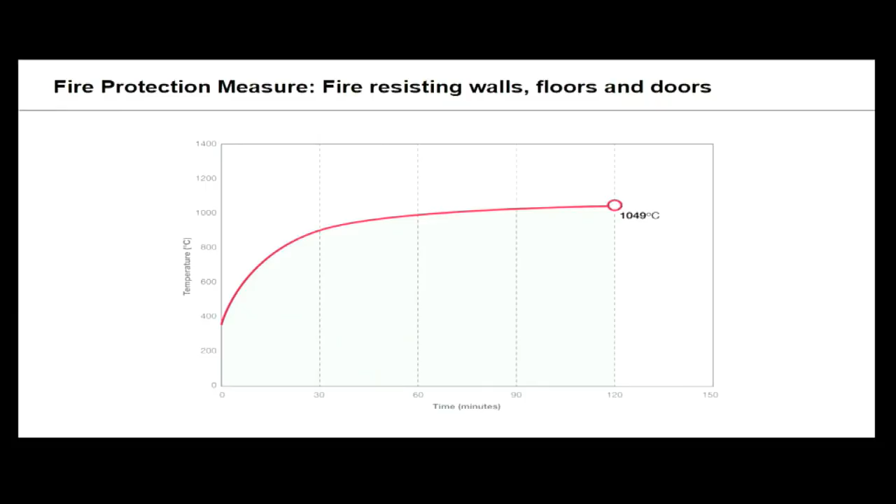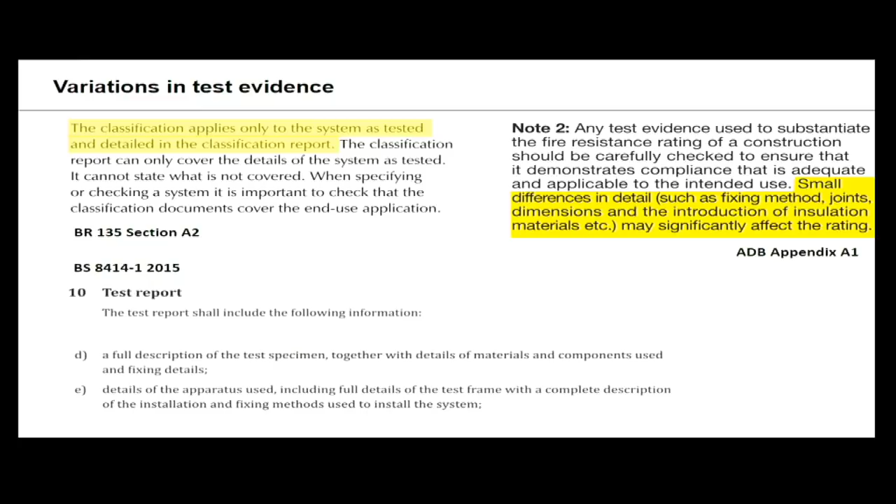It is essential that there are no fundamental differences between the tested construction and the designed for construction of an external wall. This is also true of any fire resisting feature, such as fire doors too. Such fundamental differences mean the test evidence can no longer be relied upon to demonstrate compliance with the provisions made in Approved Document B.

I will now move on to active protection measures. An active fire protection measure is one that must undertake an action of some kind and typically requires a power supply, as I said earlier. In Appendix G 2.3 of my Phase 1 report, I describe the requirements for residential detection and alarm systems.

The design guidance in Approved Document B is to provide independent fire detection and alarm systems within each flat, and for the purposes of raising the alarm in that flat only. The minimum requirement for locations of detectors within the flat is within the protected entrance hall. This is intended to sound an alarm when smoke first starts to enter the protected entrance hall in the flat, because this is the escape route within the flat. The intention is that occupants of that flat should have sufficient time to evacuate before the entrance hall becomes impassable due to fire or smoke.

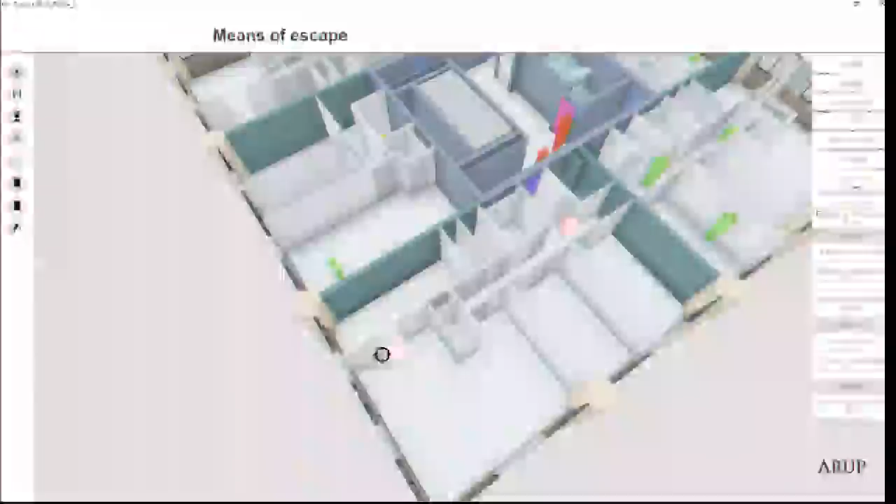Under certain circumstances, a detection system may need to be enhanced by installing additional detectors in the living room and the kitchen, or in all of the rooms in the flat. Where more than one detector and alarm unit is provided in a flat, they must be interlinked so that all of the units sound an alarm on activation of any one device.

Approved Document B, Section 5.36 states that all escape routes should have adequate artificial lighting, which illuminates the route if the main supply fails. For a high-rise block of flats, the common lobby and stair shaft require emergency lighting. Emergency lighting is connected to the main lighting circuit in the building for normal power, but it is also provided with a backup battery installed within the light fitting, with the capacity to run the light for a minimum duration of 3 hours in case the mains supply fails. The spacing of emergency lighting is controlled to give a minimum light level over all parts of the escape route in the event of a mains power failure.

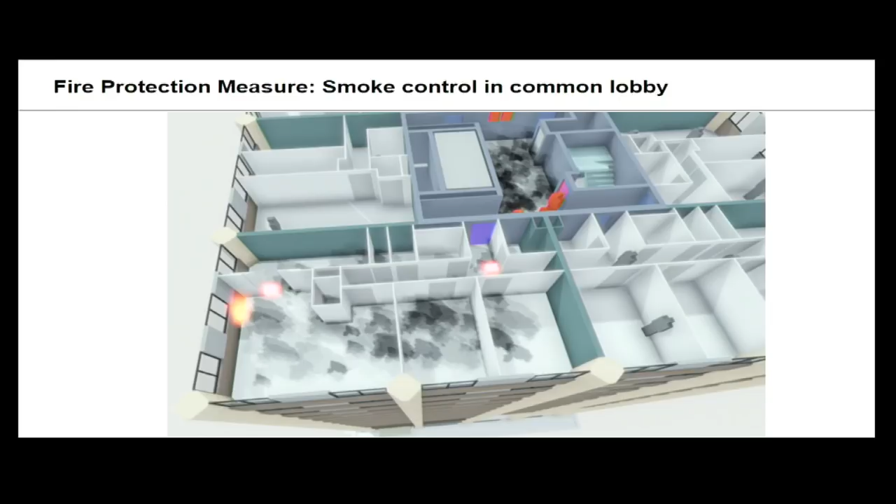Smoke control is an important provision to protect escape routes. Approved Document B states it is probable that some smoke will get into the common corridor or lobby from a fire in a flat, if only because the entrance door will be opened when the occupants escape the flat. Therefore, Section 2.25 of Approved Document B states that there should be some means of ventilating the common corridors or lobbies to control smoke and so protect the common stairs. This offers additional protection to that provided by the fire doors to the stair.

There are 2 basic types of smoke control system identified in Section 2 of Approved Document B. These are natural smoke ventilation, and, as an alternative to the natural ventilation provisions, mechanical ventilation to the stair or lobby. Approved Document B refers on to other guidance available for the design of smoke control systems using pressure differentials. This guidance is BS EN 12101 Part 6.

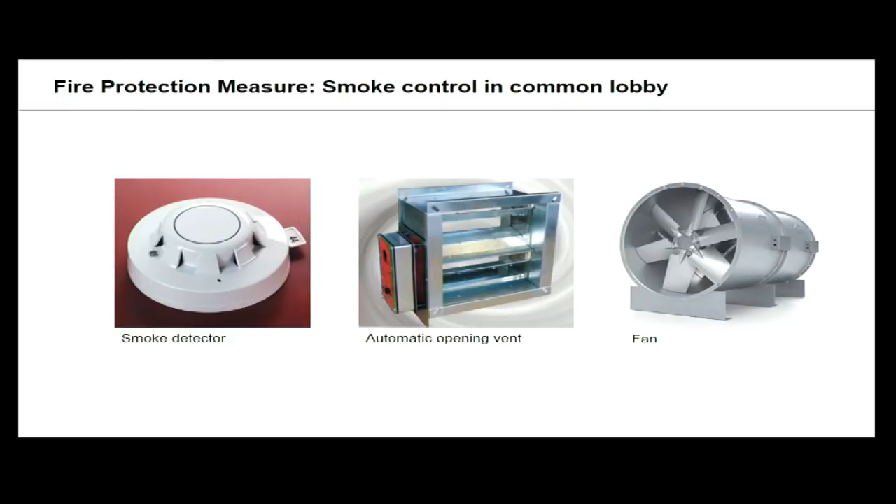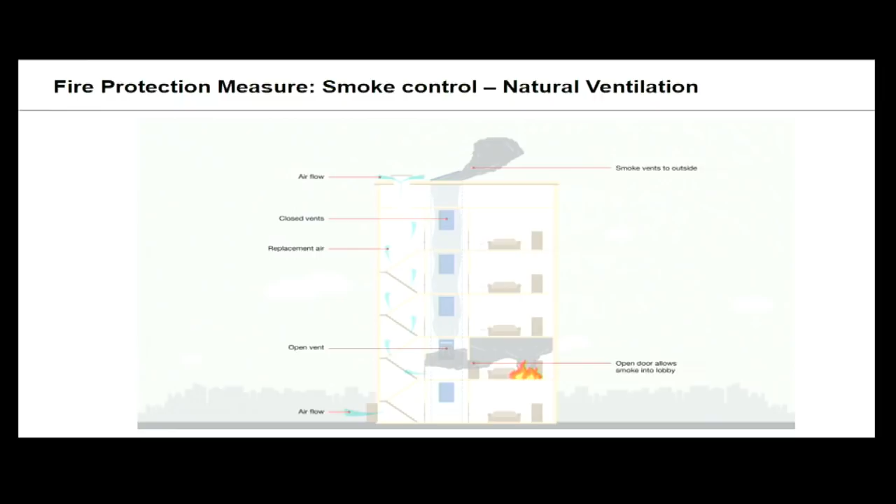If the system uses natural ventilation, then fans are not required. In this type of system, hot smoke rises up a smoke shaft under the effects of natural buoyancy and vents to outside above the roof of the building. A chimney effect is created, pulling air and smoke out of the lobby.

An alternative to the natural system is a mechanical ventilation system. This type of system can be designed to use the same kind of shaft as the natural system. However, it relies on an extract fan at the top of the shaft, pulling smoke out of the lobby and up into the shaft. The extract fan is signalled to start at the same time as the lobby vents are signalled to open from activation of a smoke detector in the lobby being protected.

There is an alternative to this mechanical ventilation system too. This is called a pressurization system. The difference is, rather than pulling the smoke out from the lobby, the fan instead pushes air down and into the stair enclosure. The intention is this air prevents the smoke in the lobby entering the stairs. The smoke in the lobby is then either pushed up a shaft provided for that purpose, or is pushed out of the building through some other opening, such as open windows.

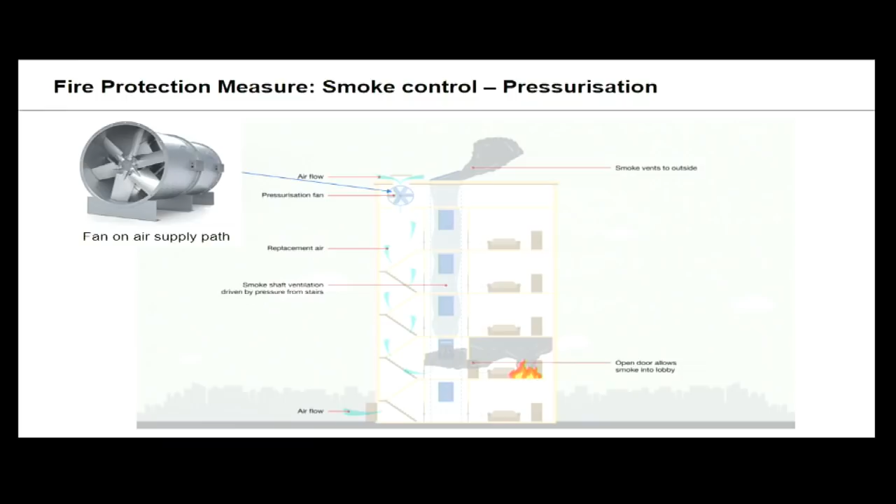Regardless of the type, all smoke control systems are designed to operate for a fire on one floor only. This floor is normally selected automatically by the smoke control system programming, which relies on the location of the detector that has first activated. In addition, a manual override for use by the fire brigade may also be provided on each floor to manually select the floor to be extracted from. The fire brigade may also change where the system is running by using controls directly on the main control panel. These panels are typically located at the ground floor where the fire brigade entered the building.

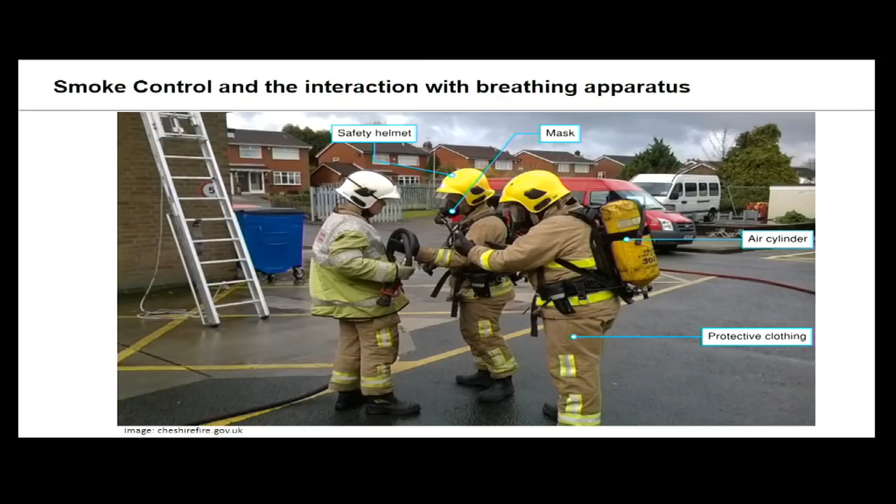As well as the building requirement to provide a safe air environment for the fire brigade using smoke control, the brigade have their own equipment too, protective clothing and breathing apparatus. Breathing apparatus is required for firefighters to pass beyond the safe air environment of the bridgehead and into the fire sector. The building regulations require buildings to incorporate adequate smoke protection to the stairs and lobbies, such that this equipment is not required until the firefighting teams are advancing into the fire floor.

Fire mains are installed in a building and equipped with valves, etc., so that the fire brigade may connect hoses for water to fight fires inside the building. Fire mains may be of the dry type, which are normally empty and are supplied with water through hose from a fire brigade pumping appliance outside the building. Alternatively, they may be of the wet type, where they are kept full of water and supplied from tanks and pumps from inside the building. There should be a facility to allow a wet system to be replenished from a pumping appliance in an emergency also.

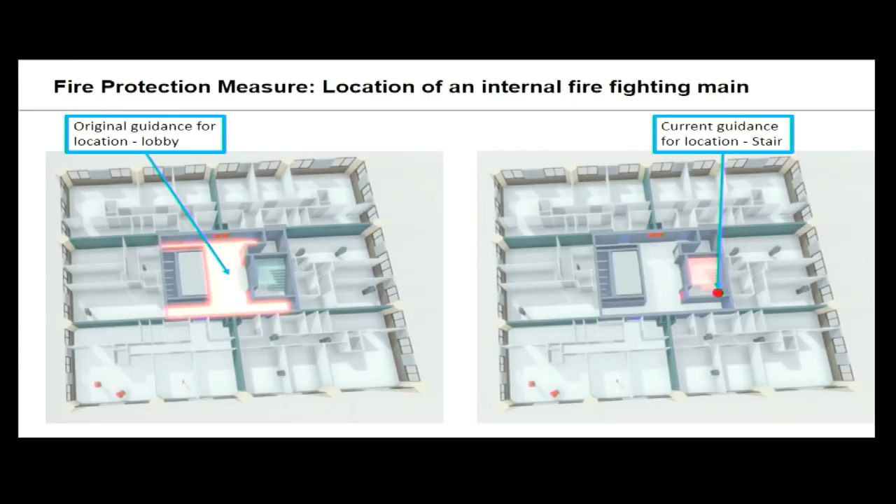In addition, the location of the outlets presented in the design guidance has changed over time. When Grenfell Tower was built, the guidance for high-rise blocks of flats was to place the rising main outlet in the common lobby. The current guidance is for the rising main outlet to be positioned in the protected stair. The firefighting hoses for the fire mains are not provided in the building nor through design, but are the fire brigade's own equipment. This ends my description of the active fire protection measures.

Finally, the presence of these active and passive fire protection measures are intended to create a layered safety approach. They provide the means for early, internal, defend-in-place firefighting. They provide the means to limit fire and smoke spread from a flat fire out to the lobby and help prevent fire and smoke spread to the escape stair. They create the high degree of compartmentation to support the stay-put strategy in high-rise residential buildings.

Those layers of safety are required to prevent reliance on the fire and rescue services for safe evacuation, as so clearly stated in the statutory guidance document. In terms of reference, those layers of protection are to mitigate the effects of a single flat fire, with minor fire and smoke spread into the adjacent lobby.

Those layers of safety are not designed to protect from a multi-storey building envelope fire, nor are they designed to protect from a series of internal flat fires occurring on multiple storeys in a building. Such events are not considered as relevant design events in the current terms of reference for those layers of safety.

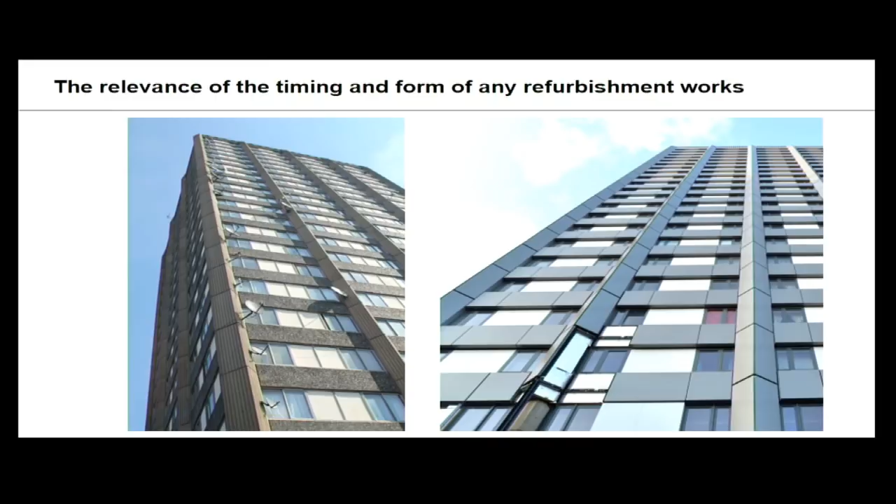I carried out a detailed review of works to Grenfell Tower since 1974 for two specific reasons. First, because I wanted to understand if any significant change to the original fire safety features had been made. And second, to understand the dates of any such changes.

This was for the purposes of understanding the appropriate legislation and regulations as may have applied at the time of that change. This was important when analysing the compliance requirements and so the performance requirements for the active and passive fire protection measures in Grenfell Tower the night of the fire. It also helped me understand the range of legislation and regulation as applied to Grenfell Tower, and helped me conclude on what, if any, difference in requirements that range created.

As I stated in section 3.4 of my preliminary phase 1 report, in respect of all the fire safety measures I have investigated, I have explained my understanding of what was required by the regulations and the relevant statutory guidance at the time of construction of Grenfell Tower. I have also then explained what is required under the current building regulations and its statutory guidance.

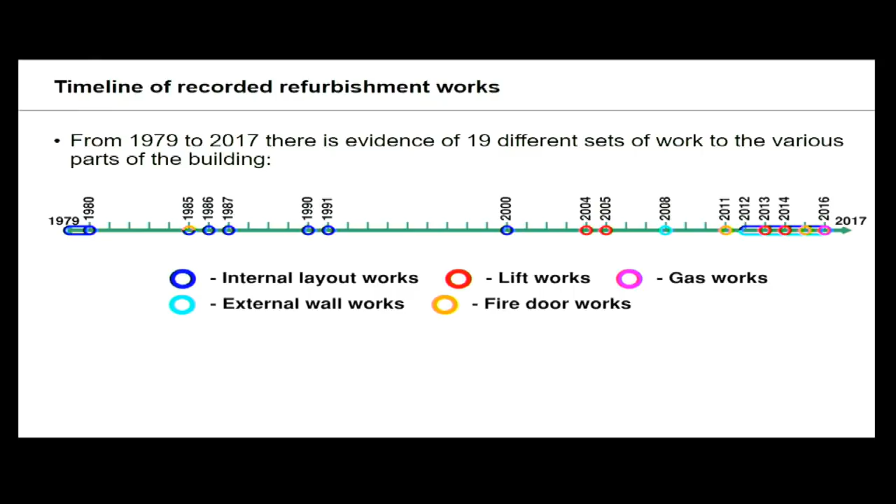For the purposes of this presentation, works include alterations or modifications, or even replacement of, existing elements of the building or its services. I have identified different types of refurbishment work with different colours on the timeline I have provided in this slide. I will now explain those works separated into types.

5 of the 9 sets of internal layout works dealt only with the non-residential floors. 1 set of internal works undertaken in 1980 was not specific on location. Whilst I have substantial detail on the most recent primary refurbishment, there is little detail available on the specifics of the other 8 sets of internal works that occurred.

4 of the 19 recorded refurbishments included work to the lifts in Grenfell Tower. In 2005, all 3 lifts in the building were fully replaced. This consisted of the 2 main lifts serving all floors and a smaller hydraulic lift that was provided to access level 2 and 3 from ground.

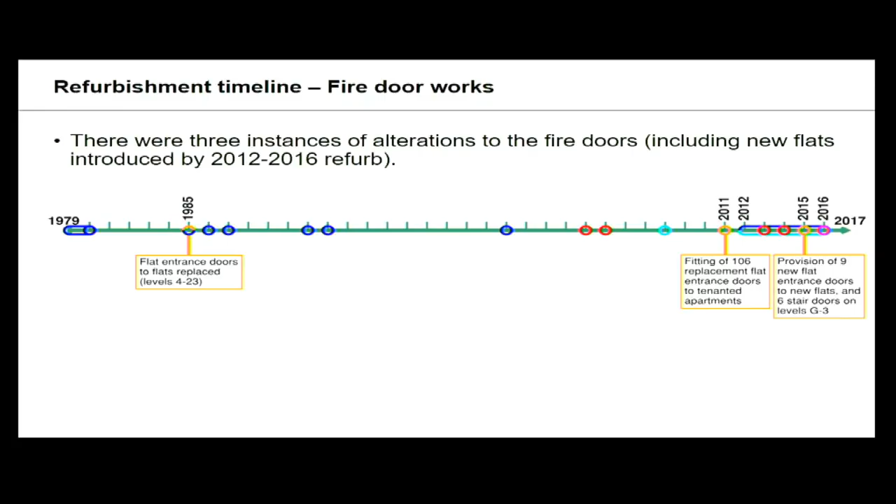3 of the 19 recorded refurbishments included work to fire doors within Grenfell Tower. Fire door replacements were carried out within the tower in 1985, 2011, and finally during the final primary refurbishment. The 1985 works replaced an undetermined number of flat entrance fire doors in unknown locations in the building. The building regulations application provided to me and associated with the works did not define the exact number of doors.

In 2011, a programme of flat entrance door replacements was undertaken. This involved fitting 106 replacement flat entrance doors to tenanted flats. No works were done to 12 leaseholder flats or 2 tenanted flats. Finally, in the last primary refurbishment, new stair doors, new flat entrance fire doors and fire doors to other rooms were provided on levels ground, 1, 2 and 3 only.

2 of the 19 refurbishments since 1974 were to the external construction of the building. Specifically, in 2008, the flat roof coverings at roof level on top of the building were replaced. Then the overcladding of the whole building, which took place from 2012 to 2016.

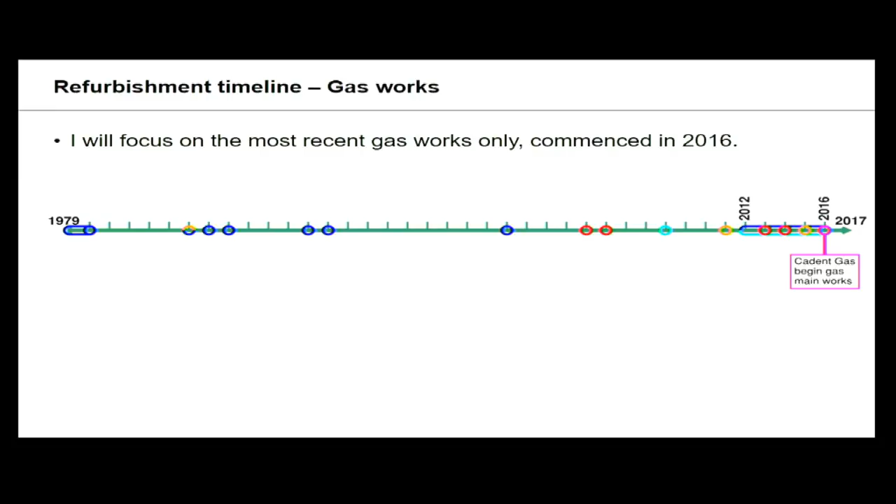In 2016, one gas supply riser running vertically up the building was decommissioned and replaced with a new gas supply pipe. The appointed gas expert, Rodney Hancock, is investigating all aspects of the gas supply to Grenfell Tower and will cover these matters in detail, including the history of gas supply related works to the tower. I have incorporated the most recent works in 2016 only for the purposes of my fire safety related work as they relate to compartmentation.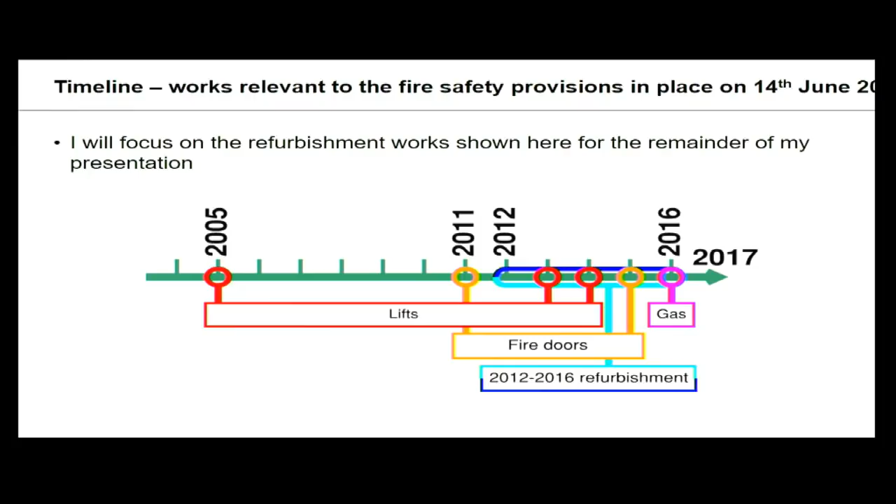As a result of my understanding of the works carried out to Grenfell Tower since 1974, I provided in section 4 of my report the specific refurbishment works that I consider to be relevant to my investigation of the active and passive systems that existed in Grenfell Tower. This is due to their direct influence on the eventual performance of the fire safety measures on the night of the fire.

These are the lift replacement works in 2005, the tenant flat entrance door replacement in 2011, the refurbishment works between 2012 and 2016, and the new tenant gas supply, which was incomplete the night of the fire. I will deal with each of these in turn in the next series of presentations.

The first of the relevant works is in relation to the lifts provided in Grenfell Tower, and so the status of that lift provision the night of the fire. Works were undertaken in 2005, as I said, with further works undertaken during the primary refurbishment. Both works are relevant to the fire safety status of the lifts the night of the fire. I will therefore describe the works during both timeframes here.

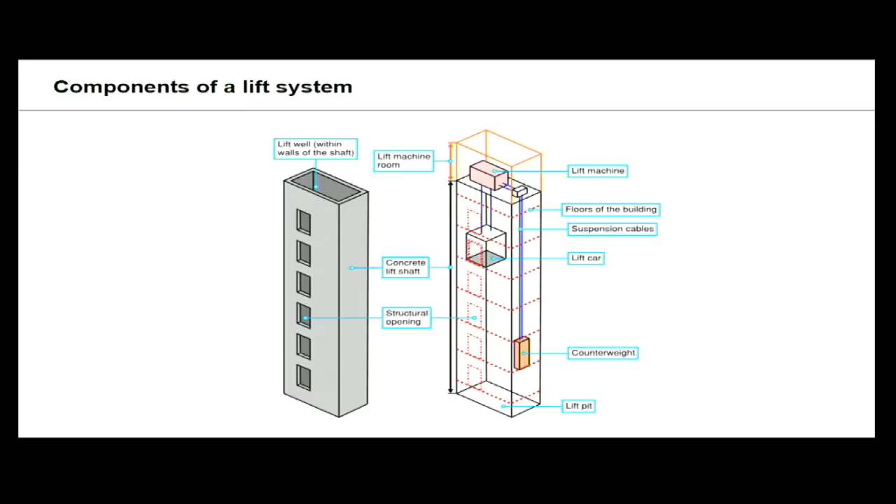To understand the fire safety features for a lift, it is useful to understand the basic components of a lift system and the terms used to describe it. These are illustrated in this image. People or goods are transported within the lift car, which is suspended by cables directly affixed to the lift car. A lift machine, typically located in a machine room at the top of the lift, drives and stops the lifts. A counterweight is used for traction.

The lift is housed within a vertical shaft. Openings in these shafts at each floor of the building allow people to access the lift. The lift landing doors positioned in each of these openings allow controlled access to the lift car and to the shaft itself.

The lift car should have a platform area of not less than 1.5 metres squared, a capacity of 550 kilograms, and reach the top floor from ground level within 1 minute. And finally, the requirement that the electrical supply to any fire lift should be provided by a sub-main circuit exclusive to the lift, with the cable supplying current passing through routes of negligible fire risk.

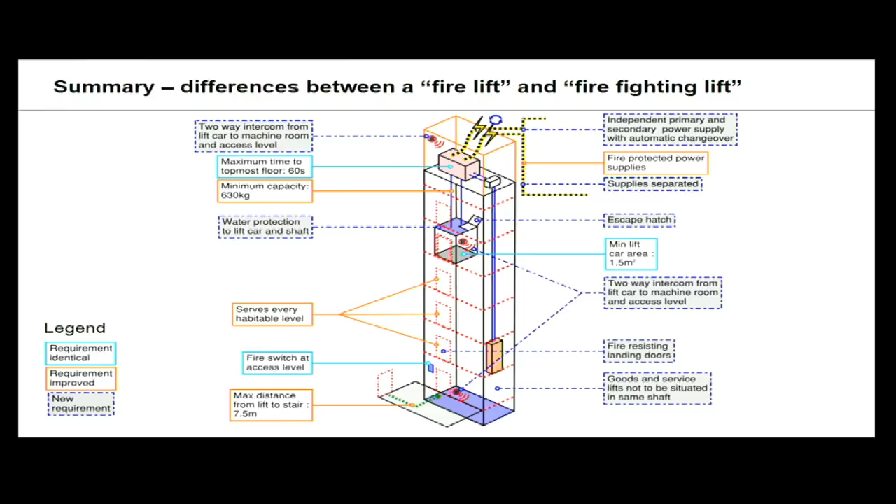And finally, there are 8 additional fire safety features required for a firefighting lift compared to a fire lift, which I've shown in blue-grey here. These are more substantial features. For example, 2 independent power supplies for the lift in case of power failure to the main supply, water protection to the lift, and the provision of an escape hatch to the lift car, fire-resisting landing doors, a 2-way intercom communication device between access level, the lift car, and the machinery room. This was the standard required for lifts used at the time of the lift replacement work in 2005 and subsequently in 2012 to 2016.

The standard of lift for firefighting is also relevant to the use of lifts for evacuation. The current version of Approved Document B, which was applicable at the time of the primary refurbishment, permits the use of lifts which meet the standard of a firefighting lift to be used as an evacuation lift. This provision applies to firefighting lifts only and not to historic fire lifts. In general, this is because of the higher standard of protection now provided to firefighting lifts.

I will now explain the lift replacement works. A complete replacement of the central lift system was undertaken in 2005. From reviewing the specification within the health and safety file prepared for the works, the standard of lift specified then was consistent with the historic fire lift standard and not the firefighting standard applicable in 2005. Then further modification works were also undertaken during the primary refurbishment. The scope of this modification was to increase the number of floors served by the 2 central lifts. During these works, the lifts were not upgraded either to the applicable firefighting standard.

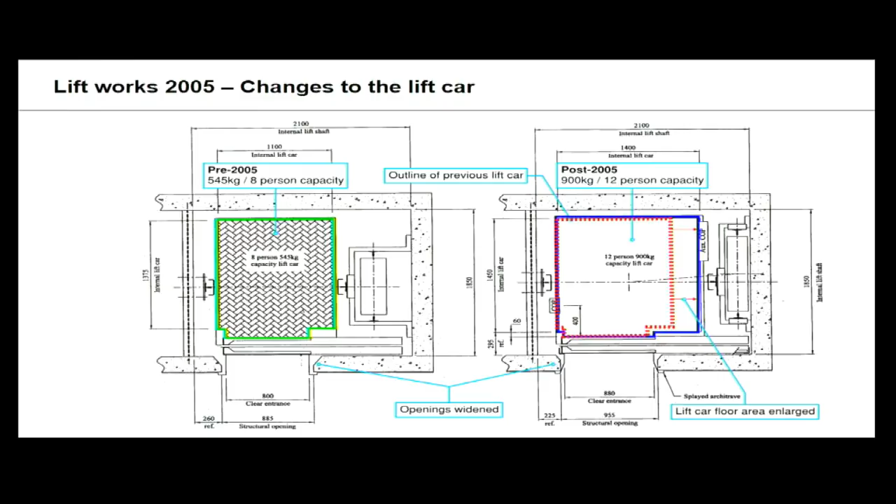The openings in the lift shaft on every floor were widened to increase the clear entrance of the doors from 800 to 880 millimetres. The new capacity of 900 kilograms did meet the minimum standard for a firefighting lift. The specification for the 2005 works also required a firefighter control switch to be installed. A firefighter control switch is required for both a fire lift and a firefighting lift.

They did not satisfy all of the requirements for a firefighting lift as existed at the time of the 2005 and the 2012-2016 refurbishment works. Key features that were required to meet the standard but which were not specified are: a secondary power supply was not specified. Electrical schematics showed it had an independent power supply. The exact cable routing is not known.

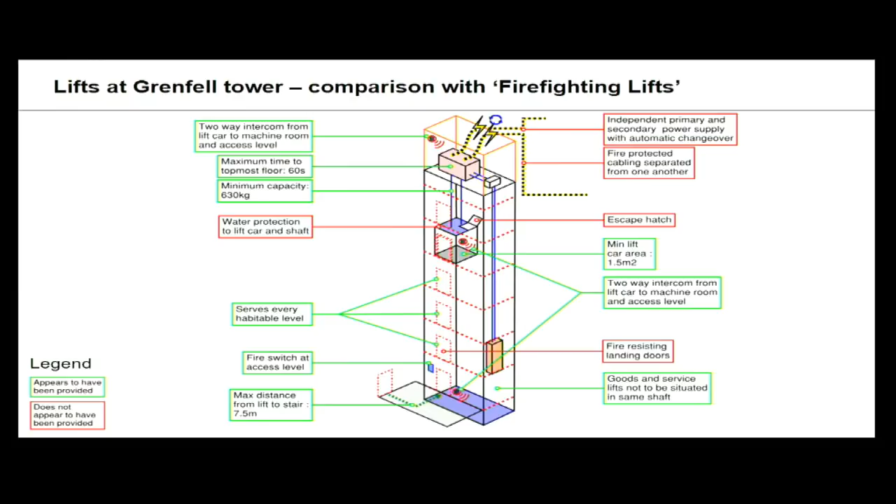The lift landing doors were not specified as requiring any fire resistance when they were required to have 60 minutes fire resistance. No water protection measures were specified for electrical equipment within the lift car and well. An escape hatch was not specified for the replacement lift car.

As the lifts were not specified to meet the standard of a firefighting lift, they could not therefore also be relied upon for evacuation, because, as it states in Approved Document B, where a firefighting lift has been provided to satisfy requirement B5, this can be utilised as part of a management plan for evacuating disabled people. Any such plan should include a contingency for when the fire and rescue services arrive. And that ends my lift talk.

Thank you very much. Will I keep going? Well, what is your next topic? I can move on to doors now, or have a break and do doors later. How long do you think doors might run for? For about 12 to 15 minutes. We could do the 15 minutes now and then break for lunch. Is that convenient? Yes. Shall we do the doors? Yes, I'll just do the doors. Okay. Thank you.

I will now describe the works that were undertaken to fire doors in Grenfell Tower in 2011. I've described the role of fire doors in protecting door openings in compartments. Compartmentation is the primary fire protection measure for the stay-put strategy. Where doors are required within walls requiring fire resistance, those doors must be self-closing or lockable fire doors according to the statutory guidance. There are various performance requirements that they need to achieve and must be subjected to fire testing to confirm these performance requirements.

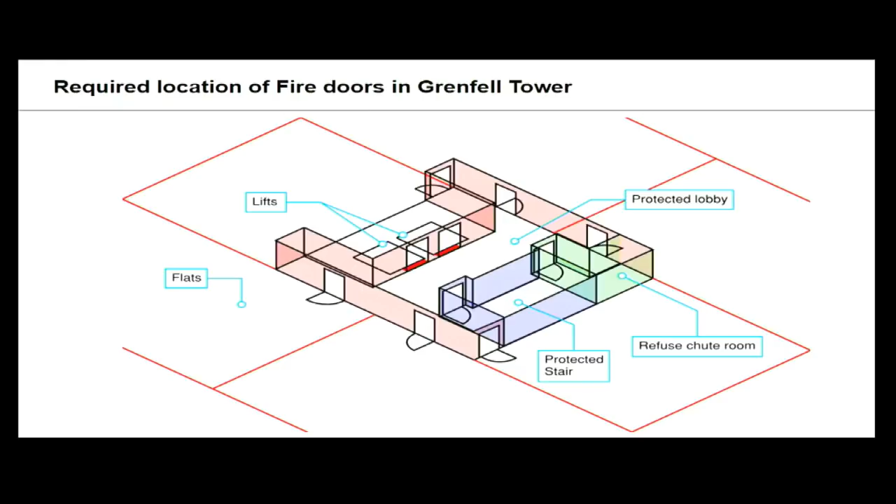First, flat entrance fire doors. The front door of every flat should be a fire door, as it separates the flat from the protected lobby. There are 6 of these doors per floor on levels 4 to 23, and they are indicated in yellow. The lift shafts must also be a separate fire compartment and should be separated from the protected lobby, as the lift doors open onto the protected lobby. The 2 doors to the lifts at each lobby therefore should achieve a specified fire resistance, as shown in yellow here.

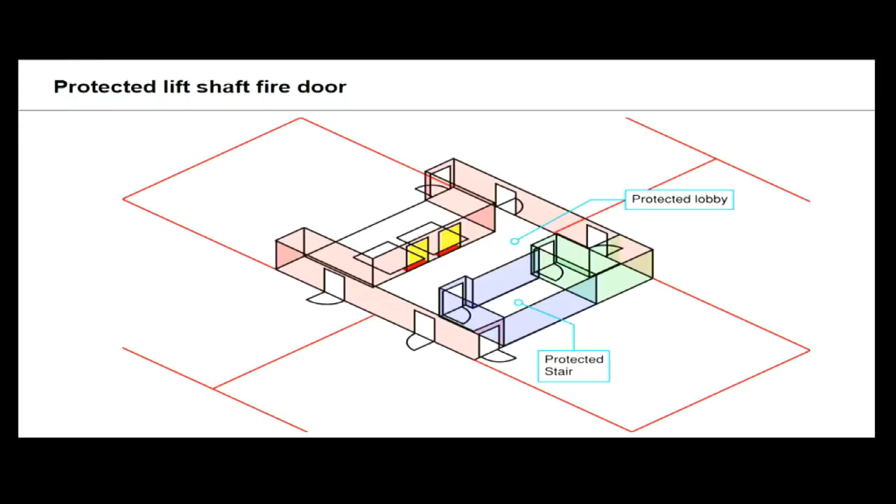The refuse chute room is also required to be a separate fire compartment, and so the single door to the refuse chute room on every level is required to be a fire resisting door, and it is located at the yellow marking there. Finally, the single door to the protected stair at each level. The protected stair is another separate fire compartment, and so is also required to be provided with a fire door.

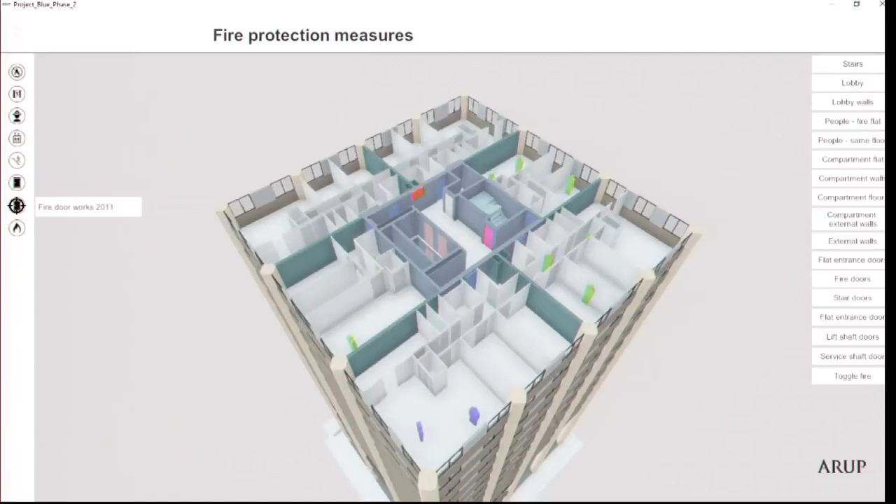In 2011, a programme of fire door replacements at Grenfell Tower was undertaken. This 3D image of Grenfell Tower indicates in the model the flat entrance doors on a typical level. Zooming out to the extent of the full screen, you can see the doors that were replaced in the tower and the doors that were not replaced as part of these works. That's their locations. The programme of work was undertaken by the TMO to replace the front door of dwellings occupied by Royal Borough of Kensington and Chelsea tenants.

106 fire doors appear to have been supplied and installed by Manse Masterdor to replace the main flat entrance doors. This is based on their door replacement schedule, which included 104 tenanted flats and 2 leaseholder flats. Therefore, 14 fire doors that were not replaced consisted of 12 leaseholder flats and 2 tenant flats. These works did not specify new doors for the lifts, stairs, refuse chute room or any other riser in the tower, nor any of the doors on levels ground to 3.

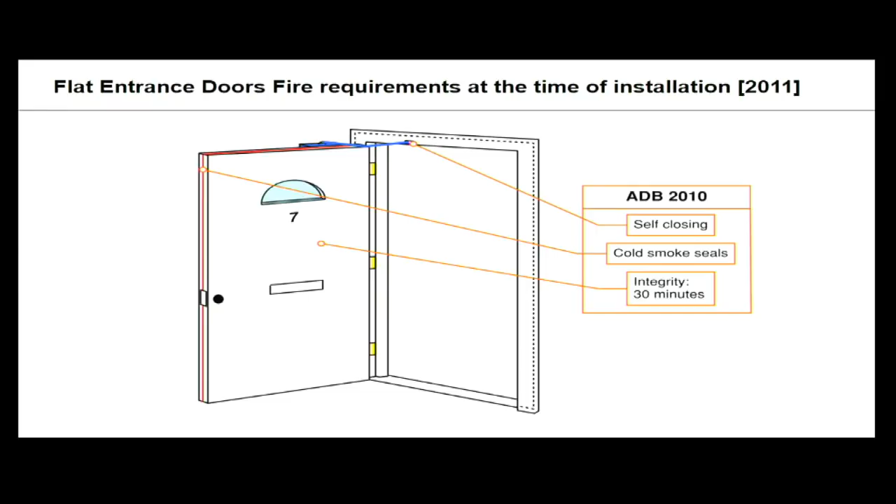The standard for the fire safety performance for the flat entrance fire doors at the time of installation is described in Approved Document B. The key requirements are integrity fire resistance of 30 minutes when tested to the fire resistance test, British Standard 476 Part 22. The doors should be fitted with smoke seals, restricting air leakage around head and jambs. No glazing is permitted unless that glazing has been demonstrated to achieve an insulation performance that is equivalent to the integrity performance of the door. A self-closing device is required. The fire door should only be fitted with locks readily openable from the inside without a key.

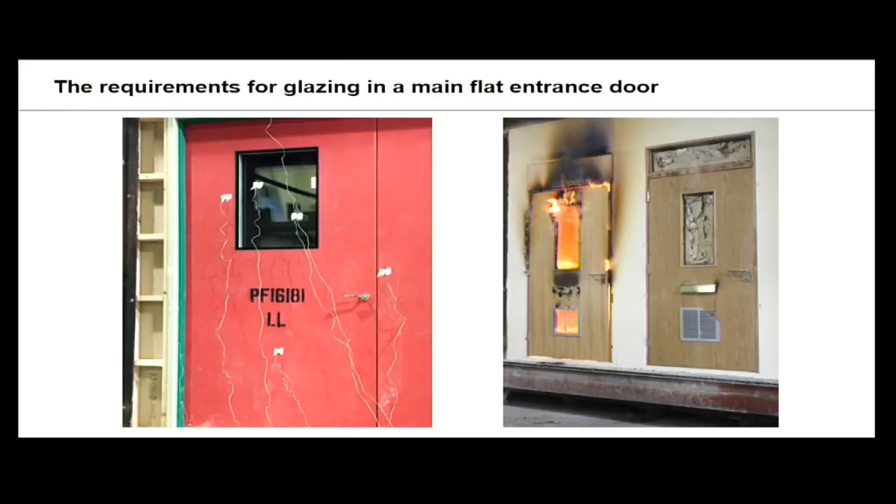Regarding glazing, any door containing glazing should have been tested with the glazing in place, or an assessment have been made to show that it would meet the required performance. The glazing must have insulation fire resistance in addition to integrity fire resistance, because Table A4, limitations on the use of uninsulated glazed elements on escape routes, as presented in Approved Document B, states no part of the wall or door leaf between residential sleeping accommodation and a common escape route of a single stairway building can contain uninsulated glazing.

The fire door product to replace the flat entrance doors in Grenfell Tower was Sure Door GRP, as manufactured by Manse Masterdor Limited. The brochure for Sure Door GRP doors describes the doors as a fiberglass composite door, which was successfully tested for the integrity and stability criteria for 30 minutes. The brochure does not state that the doors have been tested for cold smoke leakage as required, nor for the insulation component of fire resistance.

48 glazed Sure Door fire doors were installed. An example I observed is shown on the right. Sorry, I got that mixed up there, on the right. With regard to the ironmongery, the Manse Masterdor specification sheet specified different locks, different letterboxes, different self-closing devices and hinge types to that provided for within the fire test.

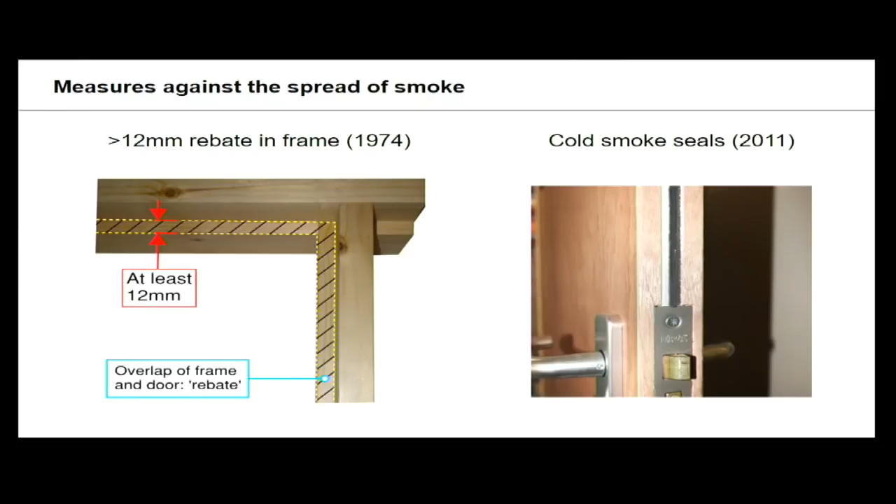In 2011, preventing the spread of smoke was, and still is, usually accomplished by smoke seals, which could be brush-like or rubber-like strips around all sides of a door that are designed specifically to seal airflow around the edges of a door.

Regarding the stair fire doors, I have no records of replacement works to the stair doors. Therefore, I have assumed that the stair doors were the original doors as fitted in 1974. Again, comparing the requirements for stair doors in 1974 as opposed to the requirements set out now in Approved Document B. In both 1974 and 2011, stair doors were required to be self-closing. In 1974, an integrity fire resistance rating of 30 minutes was required. Current standards would be for a 60-minute integrity rating. In 1974, a 25mm rebate was required. The current standard would require smoke seals with prescribed limit on airflow. I observed in Grenfell Tower that the rebate was 12mm, not 25, on the stair fire doors. A 12mm rebate would indicate that this is a 20-minute fire door.

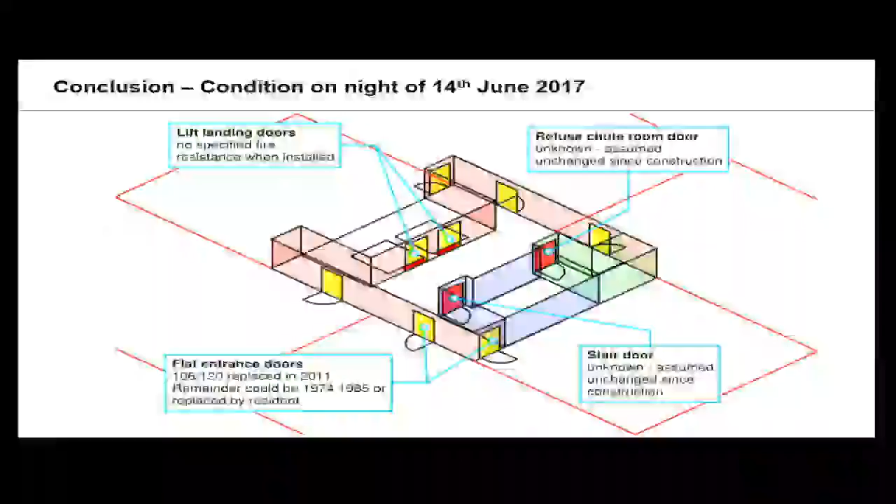To summarise the fire door provision within Grenfell Tower on the 14th of June 2017, 106 of the 120 flat entrance doors were replaced with Sure Door GRP doors. The remaining 14 doors comprised of leaseholder flats and 2 tenanted flats. They are assumed to be original doors, however few remain to be investigated. The lift landing doors were replaced in the 2005 lift works with no specified fire resistance. The stair fire doors have no documentation or records defining any replacement, so it is assumed they are the original doors as installed and appear to have fire resistance of 20 minutes. For the refuse chute room doors, currently no documentation or records of their replacement are available, and so it is assumed they are the original doors as installed in 1974.

Fire doors are a crucial element of the stay put strategy, as they represent an opportunity for weak spots to form in the fire resisting partitions that separate a flat fire from occupants either on that floor where the fire has started, or occupants in flats above the floor the fire has started. Fire doors are therefore a building regulations requirement as a passive fire protection measure. Faulty fire doors mean faulty compartmentation, and compartmentation is the primary basis of the stay put strategy.

Thank you. Thank you very much. Now, you've been speaking almost non-stop for quite a long time. Would you like a break now? Yes, I would. Well, I'm not surprised. Thank you very much, you've given us a lot to think about. Thank you. We will break then in a moment. It's a little earlier than usual. If we resume at 2 o'clock, is that going to give you enough time to finish after? Fine. Absolutely fine. Right, good. Well, thank you very much. In that case, we'll rise now and resume at 2 o'clock, please. Okay.